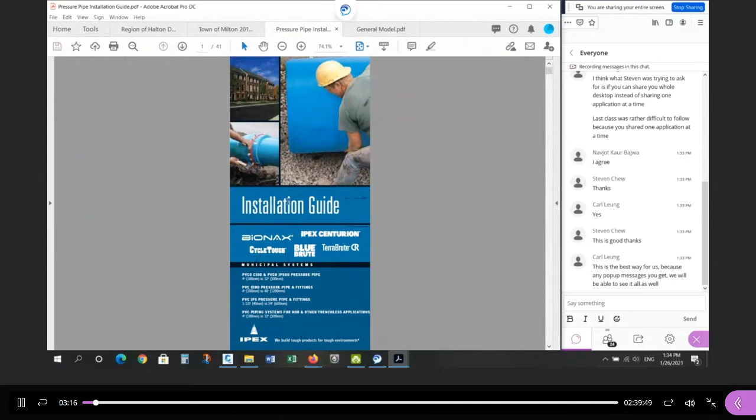So last day we were discussing the water main layout, and the water main layout is based on this document here, provided through the installation guide. So some of the features related to the water main are here. There's two techniques we discussed. We can do a joint deflection technique to mimic a radius, so kink the pipe at every joint connection. That's one way of approximating a curve. Or you can bend the actual pipe. So there's bending the barrel and there's deflecting the joint.

One of these is not allowed. Did anybody look it up in the standards? Which of these two techniques is not allowed? Are you allowed to bend the barrel or are you allowed to deflect at the joint? Bending is not allowed. And which document did you get that from, Carl? Where did you figure that out? Halton standards. Okay, very good.

So if you look at the Halton standards, you have to look at both standards. There's the town of Milton, which generally concerns itself with the roads, the storm sewer and the storm management. Sorry, I'm just going to the beginning of the document. So the town of Milton engineering standards really concerns itself with the roads. You can see here the roads, lot grading, traffic control, parks, and then drawing submission, engineering, and so on. These are the different categories that it's concerned with.

You won't see anything here related directly or in detail for sanitary or water main. Sanitary and water main usually falls under the jurisdiction of the regional government. So the storm drainage is here with the grading. So you have to go to the Halton standard. Now, when you look at this at a glance, you can actually see where the 3-hole punches are. So this is just a scanned document of the hard copy.

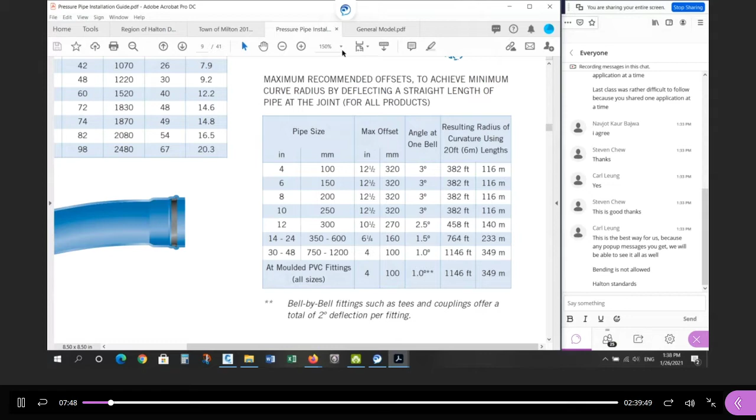So if there's a radius that's bigger than 116, then you can joint deflect to approximate the radius, okay? With this 3 degrees, and we're not going to use 3, we're only going to use 2, as it states in the standard, right? Use 70%, so 70% of 3 is roughly 2, it's 2.1, so we'll use 2. We're going to use this deflection to then navigate tighter curves without bending the barrel, but we will allow the joint deflection.

What I'm interested in doing is using these fixtures. You remember 90 degree elbow, right? 90 degree, 45 degree, 22 and a half, and 11 and a quarter. Okay, so these are the joint deflections. What am I talking about? Remember in the corners, let's go back to the drawing. Remember in the corners here, I want to go from this direction to this direction. This radius is too small.

If you list it as a standard offset of the center line or the edge of the road, it's going to be too small, 15, nowhere near 116. So you can't curve the pipe like that. So now I need to change direction from here to here. You may want to keep the curve just as an idea of where you want to put the pipe, but it can't be curved. So you might want to split the difference. I'm just going to connect this point to this point and move this line approximately here, so not right to the edge of the circle, not at the beginning, but somewhere in between, okay?

And you won't know where to put this until you finalize the location of the sanitary and the storm sewer. How do you finalize the sanitary and storm sewer? You have to put in the service connections for these 2 lots, and then you can finalize the position of the water main, okay? We'll talk more about that when we do service connections in a little bit.

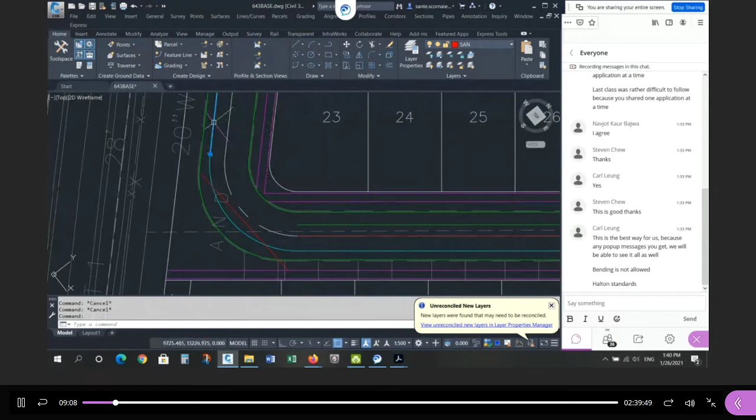So if we look at the deflection angle, you can see even by eye it's not 90 degrees. So if I extend, say, to the street line this pipe, and I extend that pipe, this angle in here is the deflection angle. So if I type in DIM and then ANG for angle, dimension the angle, if I click here and here, it tells me what the angle is. This is 96 degrees. Almost 90, but not quite.

Here's what we're going to do. We're going to take advantage of, okay, and this is a little bit of knowledge regarding the joint deflection. Let's go back to the joint deflection, right? We can kink the pipe a little bit. And we can kink it, the manufacturer says 3 degrees, right? It says 3 degrees right here, but I'm going to use 2 degrees. So at each joint, I can wiggle the pipe by about 2 degrees.

Okay, so what does that look like? Let me draw something. It might make more sense. Okay, everybody see my hand? Can you see me there? Just give me a quick yes, somebody.

Okay, so here are those fixtures. Suppose we had a water main coming down here and then turning here at exactly, this is the deflection angle. Let's say the turn was exactly 90 degrees, right? Well, then I could use a 90-degree elbow and I'm done. Okay, that's one way. I could split the difference. I can do this and have a 45-degree bend here and a 45-degree bend here. Okay, and then I can get rid of this. So here's another way.

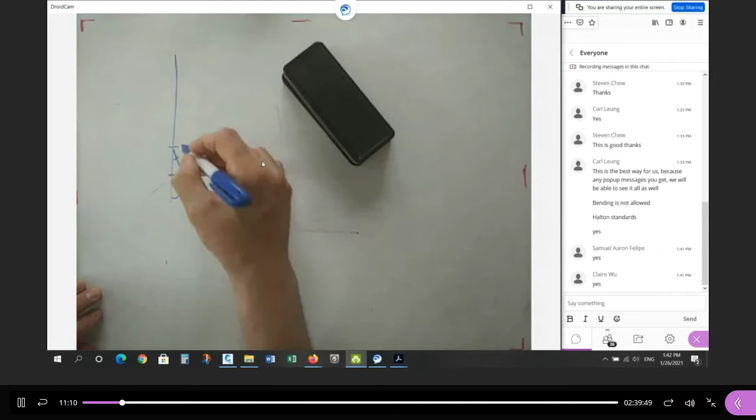45 divided by 2 is 22.5 degrees. 22.5 degrees, 22.5 degrees, 22.5 degrees. So I can get rid of the 2 45s and put in 4 22.5s and so on. Okay. If you do that, you can start to see the pipe kind of starts to look like a curve. So you can use the defined elbows to navigate these changes in direction. Again, the original two lines are exactly at 90 degrees to each other, right? The deflection angle is exactly 90 degrees.

In our drawing, let me go back to the drawing because I dimensioned it. In our drawing, we don't have 90 degrees, we have 96 degrees. Okay, 96 degrees. Back to my sketch. We have 96 degrees. So the deflection angle is 96 degrees. Here's how I'm going to use the manufacturer's installation guide to my advantage. So let me see if I can draw this. So I'm going to go here, and then I'm going to do this. Right? So here is the 96 degrees.

Okay. Now, if you look at each fixture, whoops, there's a delay there. If you look at each fixture, you'll see 90 degrees exactly. You'll see 45 degrees, right? So 90, 45, 22 and a half, and then finally 11 and a quarter, right? 22.5 and 11.25 degrees. These are the different things you can buy. Remember, this is 45, this is the 90 here, this is the 22, this is the 11, okay? Those are the changes in direction.

If we think about that joint deflection, remember the plus or minus 2 degrees. It means when you install one pipe, and typically the pipe lengths are about 6 meters, when you put the next pipe in, the next 6 meters and the next 6 meters, right? At the joint where the pipe is connected to the next segment, you can wiggle. You can take this and then offline you can go this way or this way 2 degrees. 2 degrees here or 2 degrees here, right? So you can wiggle the pipe.

Give me 2 seconds. I'm just going to grab a prop. It'll make more sense. Just hang on. Don't leave. Sorry, I couldn't find what I was looking for. Sorry, I didn't have it ready.

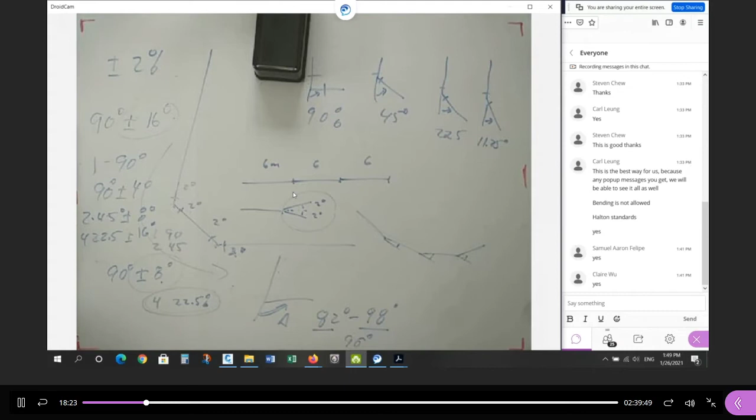And this is how the installation guide, together with the deflection angle, gives you a way of navigating not exactly 90, not exactly 45, not exactly 22.5, and so on. Okay, so this is the little trick that's played during construction because you understand the manufacturer's installation. Okay, any questions about that?

So would it be safe to assume that the more joints you have, the higher the chance of having issues within the pipe? No, at the joints you're allowed to wiggle 3 degrees, and I'm only going to assume it can go 2 degrees, so it's safer. And there's not a problem with that.

Now, there are other construction techniques. When you round a bend, sometimes they want you to backfill the trench with concrete around all these fixtures so that they're solid. They don't move. They're called thrust blocks. But that's a little bit beyond what I'm trying to show you. I'm talking about the installation guide being used as a design guide. I'm not going to give you all the details of construction; that's not really the focus of this course. But generally speaking, when there's a change in direction, they want you to fill the outside of the turn with a block of concrete. But again, that's more of a construction consideration, not a design issue.

All right? So let's go back to this document here. When you look at this entire subdivision, at these corners, you can tell by eye that this water main here versus this water main pipe here, they're not at exactly 90 degrees, but they're using two 45-degree bends, which sum to 90.

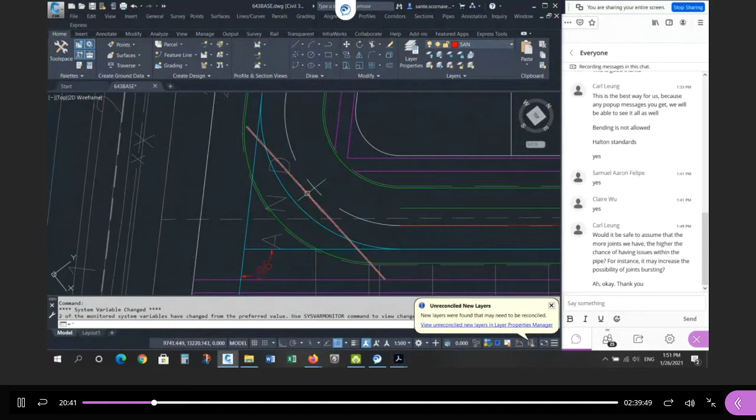So if I had to do this, and again, I wouldn't finalize this just yet, but I would put this pipe, right? Remember how I drew this pipe, right? I joined the ends of this curve, right? This point over to this point. That's how I got the two equal angles, right? So from here to here, or from here to here, this is how I drew the angle. And now I'm going to move it.

That's too far into the road, and I can move it over to here. That's too far the other way. It's going to be somewhere in between, so that the straight line kind of straddles the curve, right? Part of the curve is on one side, part of the curve at either end is on the other side of this alignment. You won't know where to put this until you finalize the position of these two, the end of this pipe. Okay, and we'll talk about service connections next. Any questions about the water main layout?

So in all the corners, here and here and here, you can propose two 45-degree bends to navigate what looks like about a 90-degree change in direction. Okay, so again, use this as a guide, right? See how they did it in this other subdivision, and you can do something similar. They've actually done it here. Any of the corners, it's almost always two 45s. And remember, a 1/8 bend is a 45-degree bend.

What are the text standards for the assignment? The radius annotations in the existing drawings are smaller than those for the pipes and water main. I'm not sure what you mean. Can you give me an example? The height of text. Yeah, so the final drawings that you need to produce at the end of the course are going to be a 1 to 500 scale. So your standard text height is going to be 2 millimeters on paper. So to achieve that, you need a text height of 1 meter, right?

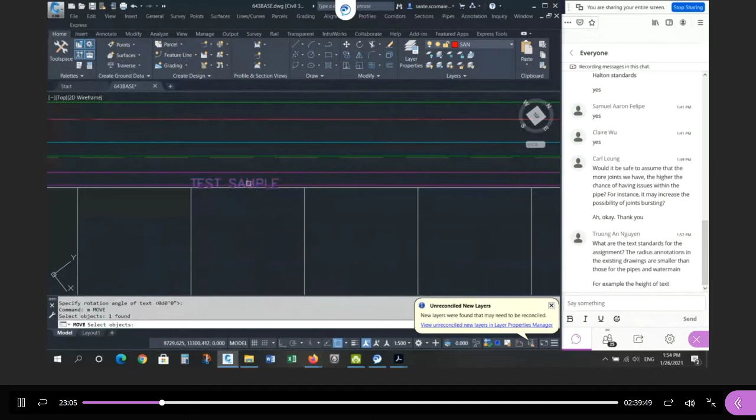So when you're in AutoCAD, the standard text height, dtext or mtext, whatever you use, once you put this in, test sample. So if you look at this, the height of the text needs to be 1 meter high. So if you use the style L80, it'll give you a 1 meter high text. Now, if you want to go a little smaller... But the text height for radius is smaller in the sample drawing. Let me see an example of that.

You're talking about here. This text height is equal to this text height. This is a little bit bigger. Don't worry about this. The label for the pipes will take care of itself when we have the style for the sanitary and storm pipe networks. Okay, we'll get into that. But these typically are 2 millimeters high, or sometimes 3/4 of that, which would be 1.5 on paper. So you need 0.75. So these are the standard heights.

So you can use a standard height of 1 meter, you'll get a 2 millimeter high text on paper. If it's cluttered and you need to make the text a little smaller, then I believe there's an L60. Instead of L80, you can go to L60. I don't know if we have it, maybe not. Okay, so then just change the text height. So instead of a height of 1, use 3/4, 0.75. So this is standard text height. This is a little bit smaller, right?

And you might want to use this height for your dimension height. Okay, but this is the typical text height. If it's a 1 to 500 scale, which it will be, you want a text height of 1. And if it gets crowded, you can reduce it by about 3/4. You can use a 0.75 high text. Yeah, it's good to anticipate that. Otherwise, you do a lot of drafting, and then the text has to be changed, and then you've got to move stuff around later. Yeah, that's a good question.

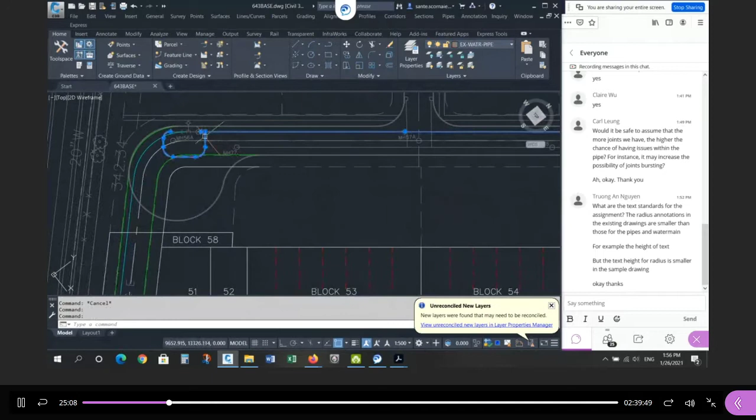Okay, any other questions about the water main layout? Okay, so you need to navigate this corner, and this corner here with 45-degree bends in all three places. Okay. Now again, a word of warning: everything you see, all this existing stuff, everything in gray, all the existing layers, do not erase, trim, delete, leave everything. Everything you see as existing has to remain on the drawing as existing.

Okay. Whatever you add, just put it on, and if it looks like there's something there and there's something new on top of it, leave it. You want to show the new, the proposed stuff. You want to show the old in case there's a removal to consider. Okay, so never draw it as if the construction's done. Don't remove something digitally because it has to be removed in fact, in reality. So leave it in the drawing so it gets identified in the estimate.

How do we name the cross and T? I would use, in the drawing here, they're using the fractions. I would use 90 degrees, 45 degrees, 22.5 degrees, 11.25 degrees. So don't use this notation. Okay, use the notation that I have. Okay. Truong, does that answer your question? I mean in the intersection. How do we name the cross and T? Talking about the water main, this stuff here.

Okay, so now you have to decide based on the pipe size. Okay, that's a good question. So there is a valve chamber detail. If you go to the Halton standards, every time the pipe crosses, there's a T or a cross, you need to have a valve chamber. So if you go to the end of this document, you'll find the valve chamber details. So there are two valve chambers, 400s. Where is it here? 400, this one. So this is standard 400.01.

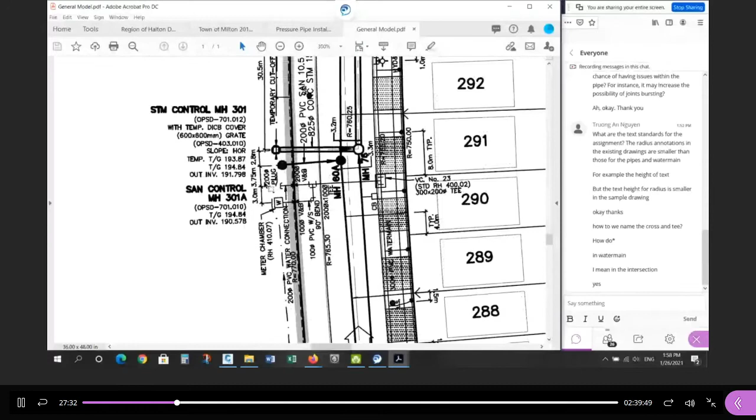So in this location and in this location, the two inside intersections, this intersection and this intersection, you're going to have a T, a water main connected to another one, the T location, and a water main, if you trim it here, another T intersection. Okay, notice this is not 90 degrees. Okay, so you need to put a chamber here and a chamber here, a valve chamber. If all the pipe sizes are 200, now you need to decide.

Okay, this structure is for any valve between 150 and 250. So you could use this, right? If this is a 200 and this is also a 200, you can use this round chamber, standard 400.01. So this one will work if you choose to use it. This one is for anything between 150 and 300. So again, we've got a 200. This shows a cross, but if you just had a T with the 200, you could use this chamber as well. So you have a choice of the 400.02 or the 400.01.

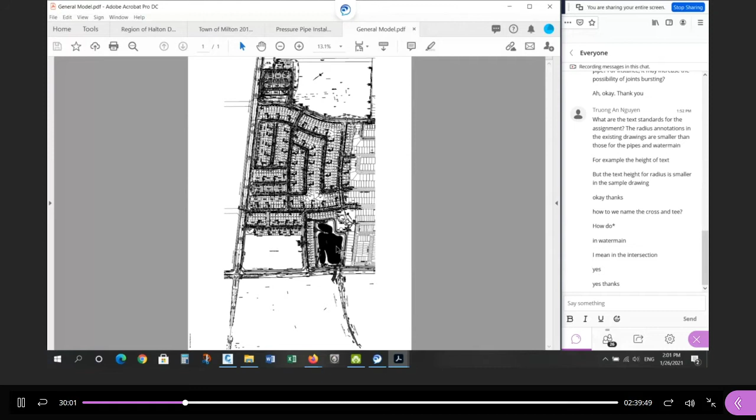So you could use either one, but one of them is preferred based on what happened before. So do some research, scan around and see what was done before. There is an example of a 200 by 200 T in this site. That's the big fat hint. Okay, so you got to figure it out. You really need to study this drawing to get a good idea.

Yeah, you want to label the water main, right? So again, if you're going to put in two bends, see these little tick lines, these two short lines? That represents there's a bend there, right? And then there's another one here, a bend here. So those little short ticks. And if you look at the drawing, you can borrow some of the line work, right? That's a T, right? This is a 90-degree bend.

So this is the size of the tick, and the distance from here to this intersection is roughly where you want to put the two ticks, right? They're just drawn manually. So that's what a T looks like. You can draw it. That's what a 90-degree bend looks like. You can draw it. If you rotate this from here this way, negative 45, there's a 45 degree and so on, right? So you can draw these for yourself.

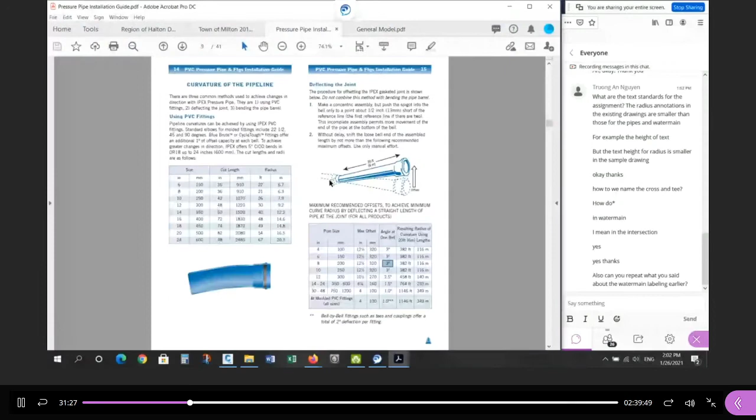You want to label those with the different fitting names. So this would be a 90 degree. Don't use a quarter, it's a 90 degree. So remember, they're labeled according to the manufacturer's guide. So if you look at the fittings, 90 degree, and we don't use the word elbow, we use the word bend. So 90 degree bend, 45 degree bend, and then the next page, 22 and a half and 11 and a quarter.

They call them elbows, but we label them on the drawing as a bend, and you can see that here, right? Two 45 degree bends is what's shown, one here and another one here. Does that help, Truong? Answer your question? As a drafting guide, look at what was done in the other subdivision and create information that's very similar.

All right. So that's the water main. That's just the water main. There are two T's, so you need to propose two valve chambers. The other thing you need to propose is two more pieces of hardware related to the water main. You need to lay out the fire hydrants, and you need to lay out the line valves. Let's talk about the line valves first, and I'll show you a mistake I found on this design.

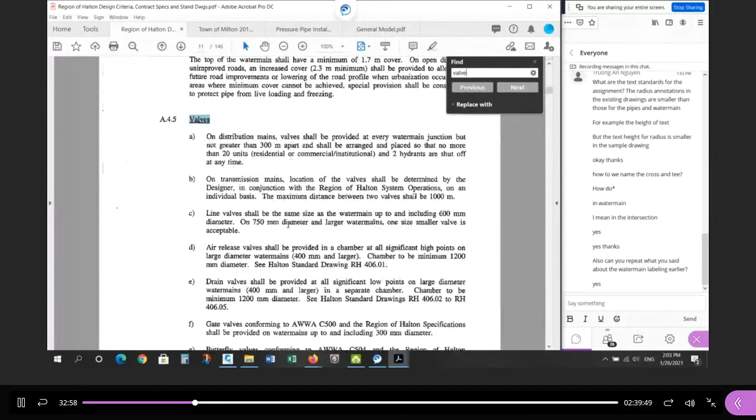If you go to the Region of Halton, and you talk about valves, I'm going to do Control F, valves. The valves here for the water main. Water valve chamber, pressure valve, valves. So here's the line valve stuff. Transmission lines, where is it? The first note. This is the note you want to look at.

On distribution mains, which is what we're laying out, valves shall be provided at every water main junction. So there are valves inside the valve chamber. Don't worry about those valves. Once you put a valve chamber there, it's understood there's valves inside. The other thing you want are line valves. I think they're on the next page. Oh, here, it's the same note.

So, at every junction, but not greater than 300 meters apart, place a line valve so that there's no more than 20 units in a residential or commercial institution and 2 hydrants shut off at any one time. What does that mean? Let's look at this drawing and try and explain that. I'm going to look at this stretch of road right here. So at every junction we have a valve chamber.

Okay, so there's no water main here, that's fine, but there is a valve chamber here. So here's the valve chamber right here. Okay, so there's the existing water main on the main road, and now it's coming into the subdivision. So from there, it comes in, there's no water main on this road, and then to this intersection, here's the next valve chamber. Okay, so there's a valve chamber here, and there's a valve chamber at the existing intersection here.

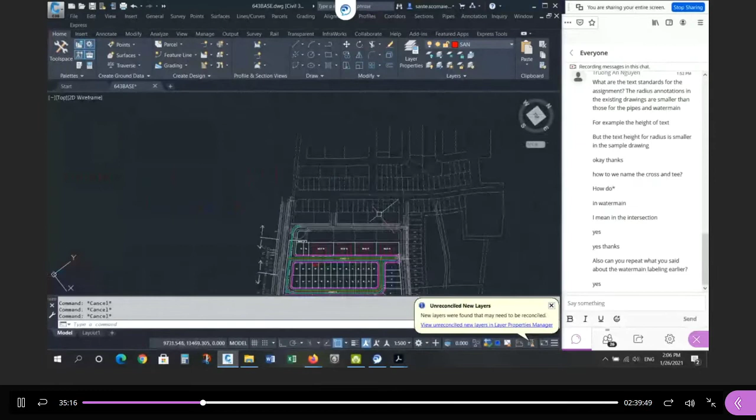Right, so I'm going from a distance from here approximately to this intersection. It's less than 300 meters. Okay, so you don't need anything in between. If you do get further than 300 meters, then you need to put in another valve. Okay, now the valve you put in is meant to do 2 things. If I put in another valve here, you want to be able to isolate.

Like if the pipe breaks, you want to make sure you can shut off the water main so that you don't have water disruption to more than 20 units. Okay, so between here and here, do we have more than 20 units? Well, let's take a look at the drawing. Right, I'm going to look at this. So between this point here and this point here, how many houses do we have?

Well, we have 1, 2, 3, 4, 5, 6, 7, 8, 9, 10, 11, 12, 13, 14, 15, 16, 17, 18, 19, 20, 21, 22, 23, 24, 25, 26, 27. So if I shut off the water main between this point and this point, I'll disturb flow to 27 houses. Okay, and that's not allowed technically according to the rules.

All right, so what you want to do is put in a line valve, right? A line valve somewhere between here and here so that you can shut off the valves in one of the chambers and then somewhere along the road, and now you can isolate less than 20 units here by shutting this part of the water main off, or less than 20 units here and shutting off that part of the water main valve. You'll notice on this drawing there's no valve chamber.

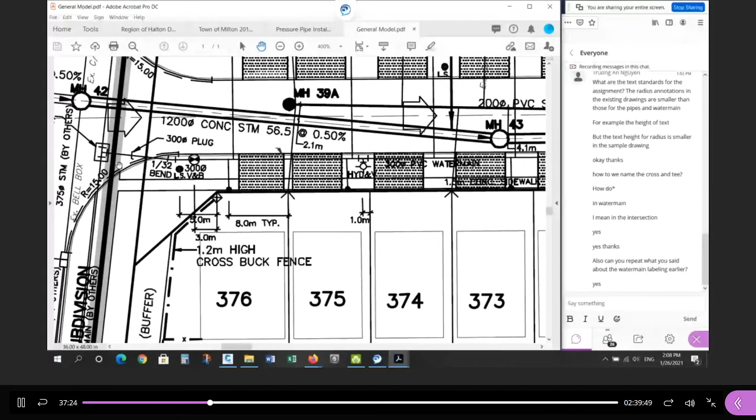This is not a maintenance hole. It's just a little cap on the ground that you put a key in and turn the valve on and off, right? So you can't crawl into this space. You can only crawl into these chambers. These are like the maintenance holes. This is not. It's just a little key access. So between here, if you look along the water main, up to here, there's no other valve.

So here, technically, between this point and this point, there should be a valve to isolate a piece of the pipe, right? Again, I'll draw it. If there was a valve here, we could shut this off, and isolate water just to these units. Or shut this off, and isolate the water just to these units.

So in my opinion, this design is lacking a valve box between here and here. Because if you shut this off and you shut this off, you're going to disturb more than 20 units. And according to that rule, no more than 20 units disturbed. Okay, now they made an attempt and they still screwed it up on Chuchmach. So I'll show you that one as well.

Here's an example. I'm just analyzing what you're supposed to do and what was actually done. Let's look at this drawing here. This is Chuchmach, just to the north of us, right? Our site's down here. So there's a valve chamber here. So if you shut the valve off in this chamber, if you move along the water main here, you'll see another valve and box here. Okay, again, this is like a maintenance hole. You can crawl inside. This one here you can't. It's just a little cap on the ground.

You open up the cap and you put a key, like a long rod, and you turn it. Okay. So if I were to shut this off and shut this off, how many houses would be without water? So let's do the math. And look at the service connections. This is the water pipe that brings water to this unit here, number 5. And notice it's just to the right of the valve chamber.

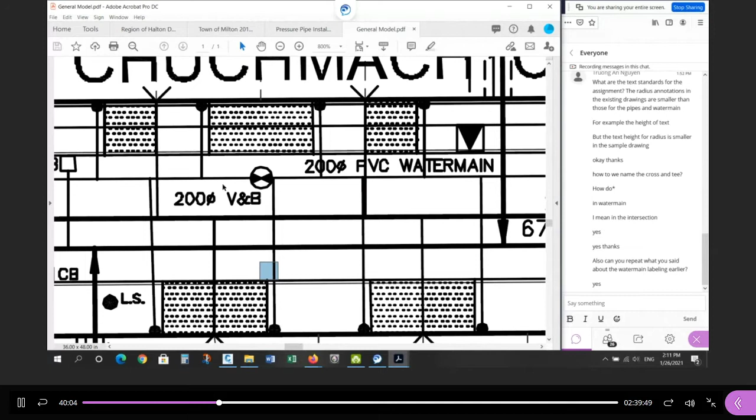If you put it here, then there'd only be 20 units on this side. Okay, so to correct the problem, you can move this over to here and have this connection on this side of the valve instead of this side. Okay, so you need to worry about this too. When you lay out your valve chambers in the site, let's go back to the subdivision.

How many units do we have on street A? Right? Well, we have 1, 2, 3, 4, 5, 6, 7, 8, 9, 10, 11, 12, 13, 14, 15, 16, 17, 18, 19, 20, 21, more than 20 between this point and this point. Right? So between here and here, there's more than 20 units if you shut off the valves at the 2 intersections. So between this point here and this point here, you need 1 valve box.

There's less than 40 units here. So put the valve box somewhere between the 2 intersections, so that if you shut off that valve and either of the 2 intersections, there's only 20 units between the 2 shut-off valves. Okay, so you need at least 1 here, and you'll find between this point all the way around to this point, you've got just less than 40 units again. Double check, you have to count them.

If there's more than 20 units, you need 1 valve chamber. If there's more than 40, you need 2 valve chambers. If there's more than 60, you need 3 valve chambers, and so on. Where do you put them? Wherever you like, as long as the shut-off main doesn't disturb more than 20 units. Okay, so that's how you lay out your valve boxes.

So the chambers go at the intersection. The valve boxes go on the line of the pipe between the intersections. So you've got a situation between these 2 intersections and a situation between these 2 intersections. Okay? Any questions about that? I wouldn't worry about the line valves until you service each of the units.

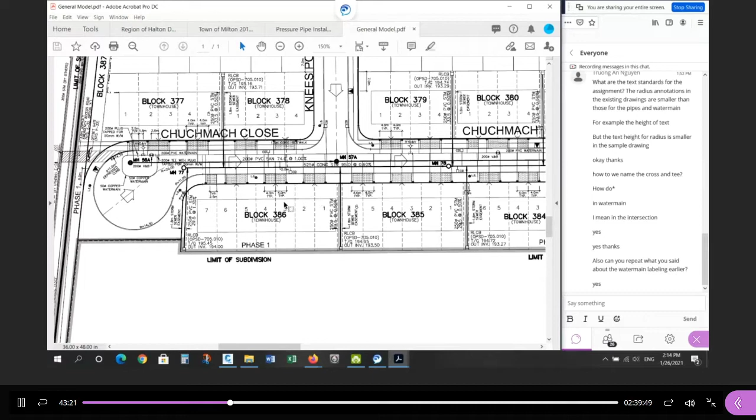Right? If you look on the road, on the water main side, you see that hydrants, right? HYD and valve, so that's the label. There's actually a valve here that we don't draw. It's understood that there's a valve to shut water off from the main to the actual device.

If you look at the Region of Halton standards, there's actually a drawing for it. It's at the end of the document. You'll see the hydrant. Sorry to do that very quickly. So the hydrant and valve looks like this. Now, this is basically what the hydrant and valve looks like. This is on a rural road. There is an urban version of it. I don't know why they don't show it. Oh, here it is. So this is maybe the urban.

So you've got the water main, right? The main line of the pipe, and then it branches off to the hydrant. But between the main and the hydrant, there's a valve. But in the plan view, we don't draw the valve. We just label it hydrant and valve. It's understood there's a valve between the main and the actual hydrant.

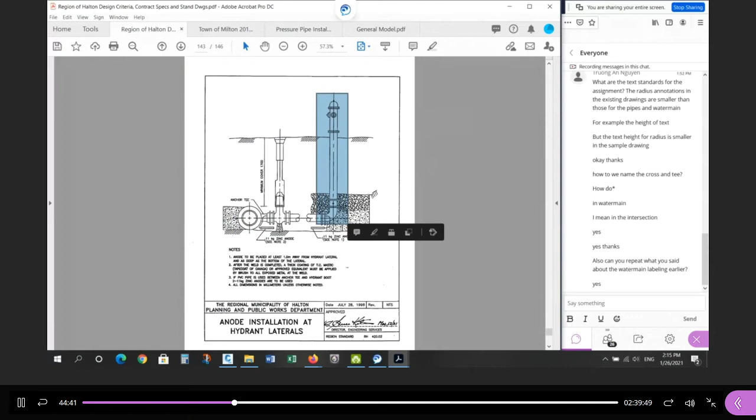So if we go back to the drawing, if we zoom in on one of the hydrants, right, here's the hydrant, right? On this pipe, there's actually a valve. There's a valve here, but we don't draw it, so that you can shut water off from the main to the actual hydrant device. Okay, but we don't draw it, we just label it hydrant, HYD and V. And that's what the drawing looks like, right? HYD and V. So we don't draw it, we just label it.

Where do you put the hydrants? The hydrants now are based on a maximum distance. So if we go back to the standards here, hydrant layout, I'm going to just search the document. So hydrant, dead end, maximum allowable, where is it? Maximum distance for the hydrant is, here we go. So here's the table. If you look at table A47, it tells you in a residential neighborhood, which is what we have, maximum spacing 150 meters. So from one hydrant to the next hydrant, 150 meter maximum distance. Okay? Now, that's the standard.

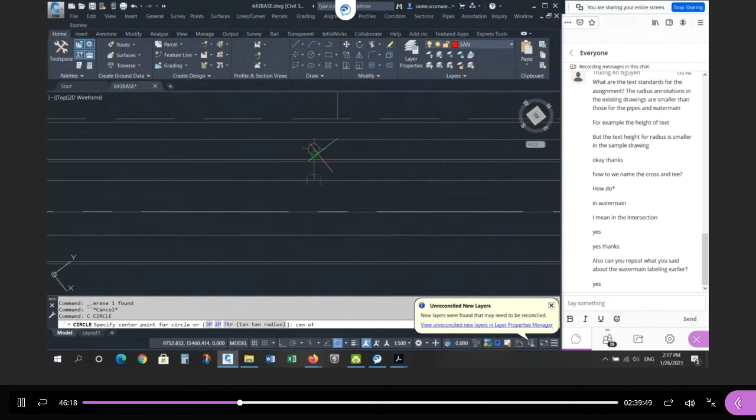The way we put that into practice is a little bit different. What we're going to look at is this. Go back to the drawing. If I know that this hydrant is here, I'm going to draw a circle with a radius at the center of the actual hydrant, a circle with a radius of 75 meters. So there's 75 meters from here to here. Now I'm going to find the other hydrant. Here's another hydrant. I'm going to draw a circle from the center, also 75 meters. If these two circles touch, I know the distance between the two hydrants is 150 meters, 75 plus 75. Two of the radii equals 150 meters.

So here we go. You'll see this versus this. See how they're not touching? It looks like there's a hydrant missing between here and here. Now, you might not have everything you need on the CAD file. Let's go look at the actual PDF. I think there's another hydrant here somewhere that might have got missed on the CAD file. So on Chuchmach, this is the first hydrant where I drew the circle. This is the last hydrant where I drew the last circle. And somewhere between, yeah, see, there is a hydrant right here between unit 2 and 3 on the north side. So if I drew that circle, then the three would overlap. So this hydrant is actually missing on the CAD file that I gave you.

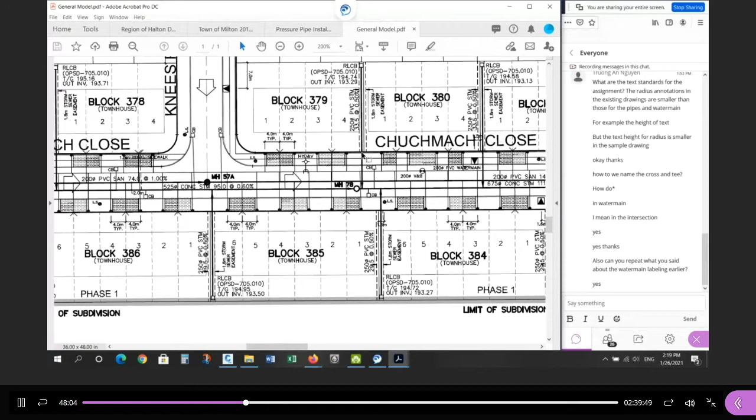If that were there along the line of unit 2 and 3, let me see if I can draw that. See that the unit lines are missing. I can't even draw it. Let me see if there's a dimension. Not really. So it's unit 2 and 3. I'm going to assume the unit width here is the same on both sides of the road, the same as what we're doing on our site. So I'm going to go from this block line 1, 2, 3 units over, starting on the edge. I want this distance. I'm going to go to my CAD file, start here, and make a copy. Let me see if it works. A copy of this stuff from here over to here, and I'm going to ignore the last few.

Okay, but from here I'm going to go 1, 2, 3 units. Let me see what that is. From here I'm going to go 1, 2, 3 units. 1, 2. So there should be a hydrant right here. So I'm going to make a copy of this hydrant. Should be approximately. This is what's missing. Now you don't have to do this. I just want to show you for an example, right?

So where does the hydrant go? I'm going to offset from the center of here, perpendicular to center. So that's the offset to the center of the hydrant. I'm going to make a copy of that from the center, intersection of this offset line and this unit line. That's where the hydrant should go. Okay, so there should have been a hydrant there, and it's not showing for some reason.

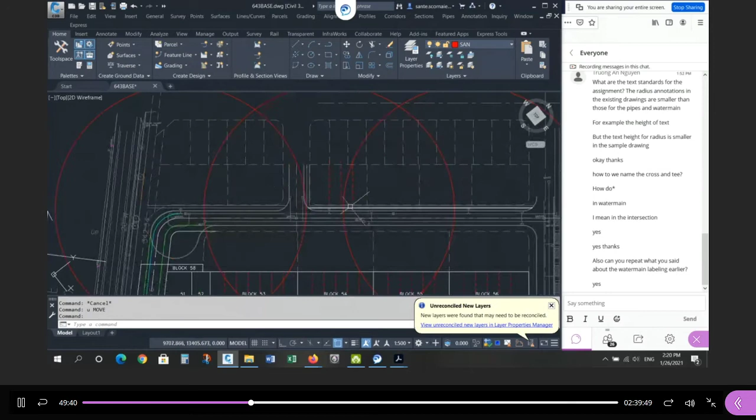Okay, if I draw a circle here, 75 meters, you can see this circle intersects this circle. If I take one of these circles and I move it over, if they were just touching, I'd have 75 meters from here to here and 75 meters from here to the center. But you can see they're clearly overlapping. So when you're overlapping your circles, you know that the centers of the two circles are less than 150 meters apart. Okay, so that's how we kind of lay out the hydrants using these circles.

Now we don't just look at the distance along the center line of the road, we actually look at the lot coverage. Okay, this is kind of weird. So you don't have that hydrant there. Don't worry about it. We're not checking what's happening outside the site. We want to make sure that we get our site. So I want to know where this one is, and I want to know where this one is. What's happening in between here is not that important to what we're going to do.

But let's draw some more circles here. I'm going to draw a circle from the center of this hydrant, 75 meters. I'm going to go to the next hydrant. Next hydrant is here. I'm going to draw a circle, center, 75 meters. Notice these two overlap, which means the distance between the center of this circle and the center of this circle is less than 150 meters. Everybody see that?

And if I keep going, I believe there's another hydrant north of here. So from here, if I go north, I think there's one at the intersection. Again, it's not a complete document. So I found this hydrant, and I think there's one at or near the intersection here. The water main jogs across the street, and there should be a hydrant nearby, I hope. Hydrant here, and then there's a hydrant here. Those two are pretty surely less than 150 meters apart, and so on.

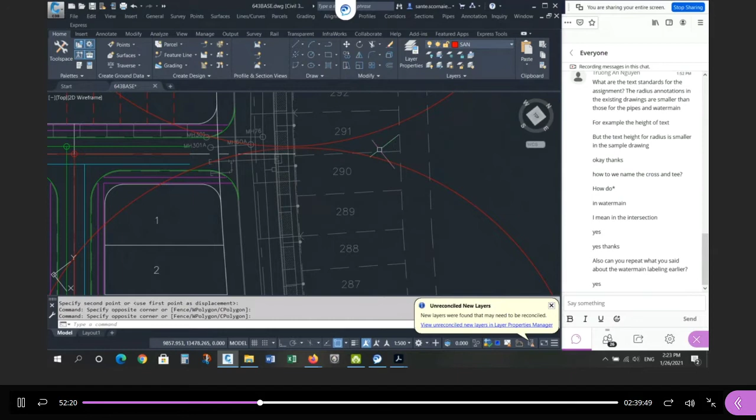So then you would have to move that hydrant over so that everything is inside the overlap of all the circles. If there's any gaps like this, they're going to make a comment. Yes, they're less than 150 meters apart along the road, but there's a part of the backyard that's missing. So you want all these circles to overlap a little bit, and you want to make sure that the backyard area is inside one or the other or both circles. Right here, this little piece is missing, so that's no good.

So what am I talking about? We need to place hydrants inside the site. Where do you place the hydrant? How do you know where to put the hydrant? What's the distance from the center of the hydrant to the right of way? That's on the standard. So we can look at E2 again. So if we go back to E2, this one here.

So if we look at E2, how do we draw the hydrant? Well, we know the hydrant is 2.6 meters away from the street line. And the hydrant is on the same side of the road as the water main. We wouldn't put the hydrant on this side. We don't want this part of the pipe to cross the sewers.

So wherever the water main is, that's the side of center that the hydrant is also on. And you'll see that in the drawing already, right? Here's the center line. The water main's on this side, so the hydrant's on that side. We never cross the sanitary and storm sewers. We keep the hydrant and the water main all on one side so that we don't have any crossing issues.

So the offset is 2.6. So to draw that in our subdivision, if I wanted to put a hydrant, say over here somewhere, I would offset 2.6 from the street line. So anywhere on this line is where I can put my hydrant. Same thing here, offset 2.6. Anywhere here I can put my hydrant. Okay. Where do you put it?

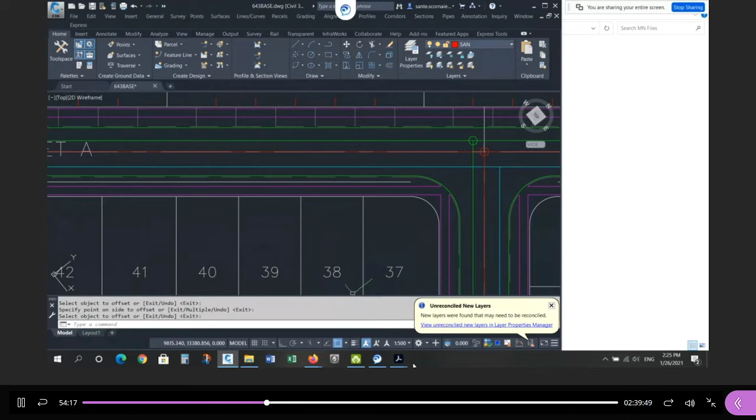Well, you need to know where all your driveways are. You can't put a hydrant in the middle of a driveway. So this is something you do after your driveways. You don't put a hydrant in on top of one of your water or sanitary sewer connections. So you have to service each unit. What do I mean? Before you lay out your hydrants, you want to know for each lot where is the sanitary connection and where is the water main connection.

So you want to lay out your services first. You want to lay out all your driveways first, so that then the hydrant is not in a driveway, is not on this pipe, is not on your sanitary pipe, right? Because you can't have the hydrant on top of anything else. So the hydrant is one of the last things you do. You have to lay out your driveways first. You have to lay out your water services first. You have to lay out your sanitary services first.

There are no storm services. Okay, they're using sump pumps. I'll show you that detail in a moment. You want each individual lot, driveway, sanitary, and water connection determined first. And then you worry about your water main hardware. Where do you put the hydrants? Where do you put the valves on the line? Okay, so it's one of the last things you do. So let me give you an example. Any questions about the hydrants and the water main?

I predict, I haven't done the exercise this year, you're going to need at least 4 hydrants. Okay, that's my guess. I haven't done the design myself, so we're kind of doing this together. I'll have to do it to mark it so that I know it's good. But if you look at our subdivision, I'm going to draw a circle, 75 meter radius, 75 meter radius, 75 meter radius, 75 meter radius. I predict you're going to need at least 4 hydrants, right?

Somewhere over here, right? And that's not close enough. You want them to overlap so that there's no backyards unaccounted for. So I'm just roughly figuring out. And then I want the center of these. That's roughly where the hydrants are going to be. And you can move them both together now, right?

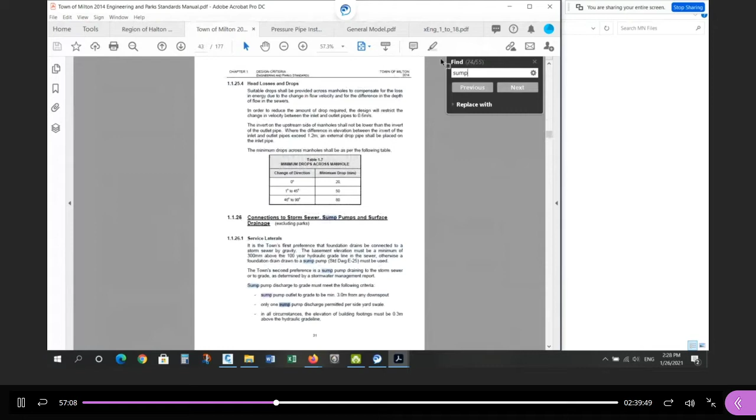Next set, sorry, 19 to 32. Sump pump looks like this. Whoops, like this. I believe they're doing this as opposed to this. There's 2 options. So basically the storm sewer is not as deep as your footing. So to collect the water around your footing, there's actually like a pit inside the house, and then they pump it up over the foundation wall.

They might pump it into a pipe that goes into the sewer, and I don't think they're doing that. Otherwise we would have to draw this pipe, or at least this piece of the pipe in the right of way. So they're not doing this, they're actually doing this. So again, they're pumping the water that accumulates around your footing into a pit in your basement, and then an electric pump will take that water up over the foundation wall onto the ground.

This will go along your front lawn, into the roadway, into the catch basin, into the street sewer. So this is what's happening. So there's no storm connections. And if you look at the drawing from the previous subdivision, you'll see that there are no storm connections, just sanitary. Right? This is the sanitary pipe. This is a pipe. It's a dual. It connects to both. Okay, so sanitary and water only.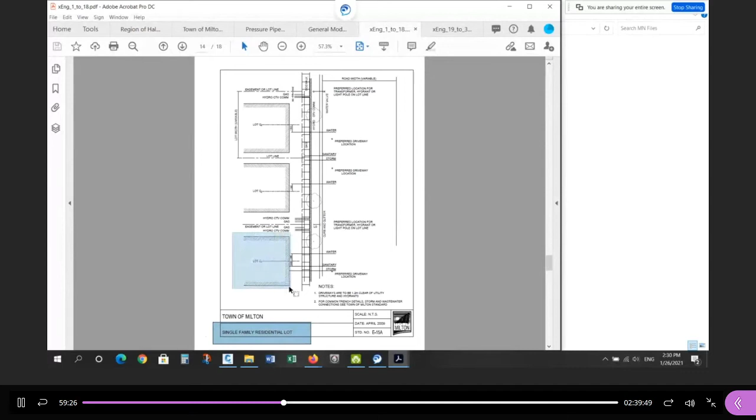You have examples of what those dimensions are. Now, there are standards which they didn't follow. So let's look at the standard, and then we'll look at the actual. Okay, so here is a single family residential lot. So 1 unit, 1 unit, 1 unit. This is how you service. Okay, so let's look at the middle one right here. If we have a property, how do we get water, sanitary, and storm to that property? Well, there's two ways of doing it.

You can do a dual connection. So there's one pipe, and then it splits off so that one part of the pipe connects to this house and one part of the pipe connects to this house. So this is called a dual connection, a shared service. Okay, that's one way of doing it. So every other lot line will have a double. Okay, and if you look at the design, you'll see that here.

Right, this one pipe services both of these lots. You can see the branch off here. Then you skip this corner and you go to the next one. This one pipe services these two lots, and so on. So these are called duals, dual connection. Okay. Now notice there's no storm sewer, so it's just a sanitary. So this is the standard, right? We only show the sanitary pipe, and it's right on the center.

Notice the split happens outside the right-of-way in the road, but on the drawing they show those inside. So the drafting is a little bit different, but that's fine. It's just a symbol, really. The other thing you'll notice is the water main. So if you take the center of the lot, 1.5 meters to one side, and if you stand on the road and face the house, is this the right or the left side? Is this offset right or left?

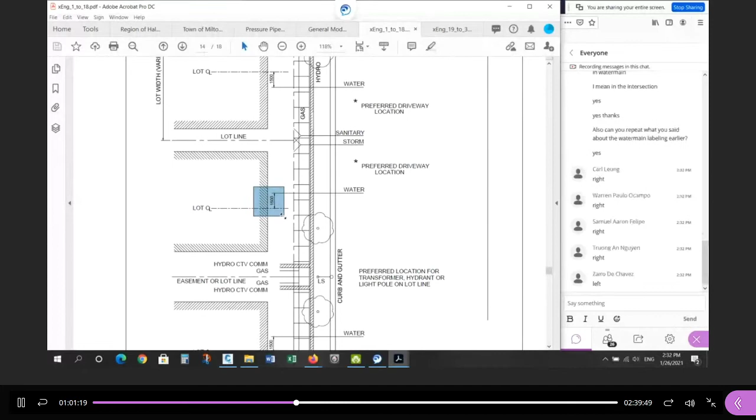Is this 1.5 meters right offset or left offset? If you're facing the house, are you putting the service to the right or to the left? The right. So when you face the lot, if you stand on the road and look at the house, this is on your right side.

Okay, so this is a dual shared connection, but we're only going to put in the sanitary, and it's right on the center. This is a single water main. There are no double water mains. Okay, they're always separate. Okay, so this is a shared connection. Now, if you have an odd number of houses, one of the houses needs a single connection. So you'll see that here, right here.

All right, so from the center line, you always put the water on the right side, 1.5 meters away from center. And the sanitary and storm, you put them on the left side, 1 meter away, and then a certain distance between the two pipes. Okay, and there's a drawing for how close those pipes should be together. We don't need to worry about it because we don't have a storm sewer.

Okay, so from the center of the unit, you go 1.5 meters to the right and 1 meter to the left for water and sanitary if it was a single connection, one pipe, one house. If you're going to share them, which is more cost effective, you put them between the units. But the water is always 1.5 meters to the right.

Okay. Here they're showing it 1.5 meters to the left. You see here, they're showing it 1.5 meters to the left. And why did they do that? Because it depends on where you put the driveway. Okay, so this is the standard. Let's look at what they actually did in practice. So if Professor Neruzzi asks you what's the standard, you can quote E15A.

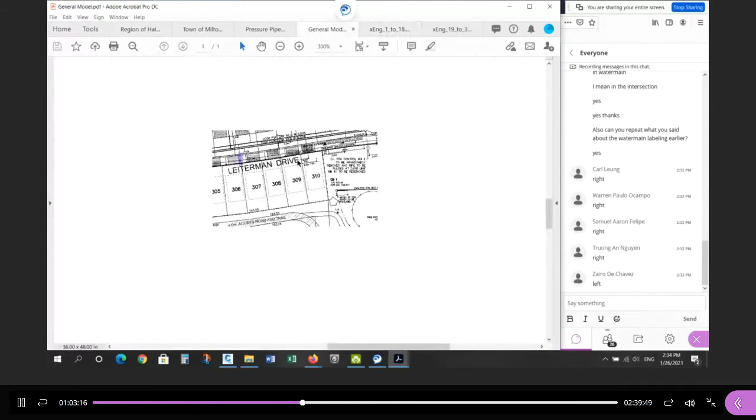However, the other engineer did something a little more practical. Okay, so let's look at how they laid out single lots for water and sanitary, and there's no storm. Okay, so let's look at the actual drawing. So this is the standard. This is not exactly what was done. If we look at the general model, and we can look at any single units, right, single individual homes, you'll see they paired them.

So the sanitary, two together. The sanitary, two together. So they paired them. If there's an odd number, then they went with a single. Where did they put the single? Where's an example of a single? Right here, this unit. See this single line? That's the sanitary connection. One pipe, one house. Whereas this is one pipe servicing two houses.

Okay? So this doesn't need a dimension. It's right on the corner of the property between the two units. This one here should be dimensioned. Where is this pipe? How do you know where to put it? So there must be a typical dimension somewhere. And I believe, if I can find it, right here, 6 meters. Oh, no, not 6 meters. Where is it? There's a typical dimension. I found it. I think it's on this street here. Here it is, 4 meters. So it's 4 meters from the corner closest to the driveway side.

And here's another, that's not typical. It doesn't say typical where the water service goes. They moved that from typical because of this valve chamber. So let's talk about this. I'm going to draw it. I think it's easier if I draw it. Okay, we're talking about single units. Let's go to my handwritten drawing. So let's suppose we have a bunch of houses. All right, so these are all single lots, not townhouses.

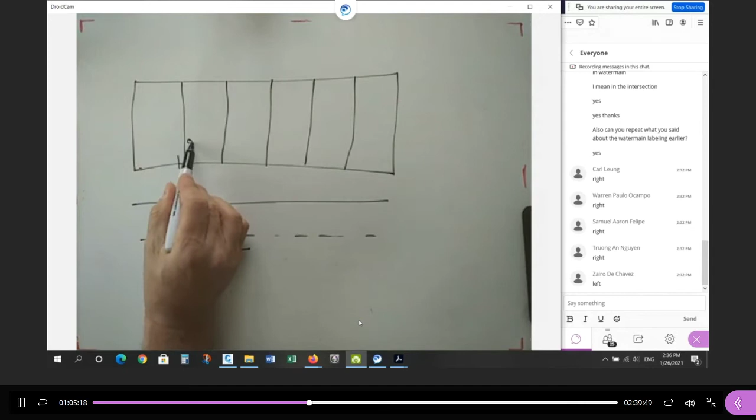Okay, if my back of curb is here, my center line of road is here. If the profile is falling this way, we want to lay out the drive first on the high side. So between these 2 points, this is the high side. So we go 0.6, remember this offset, 0.6 offset. And then we go 6 meters for the driveway, right? And where it's offset from the lot line, you want this and the driveway to be parallel.

So there's my driveway. Okay, and I can draw those all here. From the high side, 0.6, 6 meters away. From the high side, 0.6, 6 meters away, and so on. So these are my driveways. How do we do the sanitary connection? Well, 1, 2, 3, 4, 5, 6. There's 6 units here. Let me draw one more just so you can see the odd one. Suppose there were 7 altogether.

I would pair them. This is how I would do the sanitary. I would draw a pipe right from the corner to the sanitary sewer. Right? Let's assume the sanitary sewer is right in the middle, center line of the road. So I would draw one pipe and I would branch off into the 2 lots. Then I'd skip this because this is already serviced. So I'd draw one pipe, branch off into 2 lots. And here I would draw one pipe, branch off into 2 lots.

This one here, and let me draw the driveway, right? Remember it's falling this way, so this is the high side. So here's the driveway, right? 6 meters wide, 0.6 offset. Where would I put the service connection? From the high side, I'm going to measure 4 meters. So from here, I'm going to offset 4 meters, and I'm going to draw a pipe to the center line so that the distance from here to here is 4 meters typical. Oops, typical.

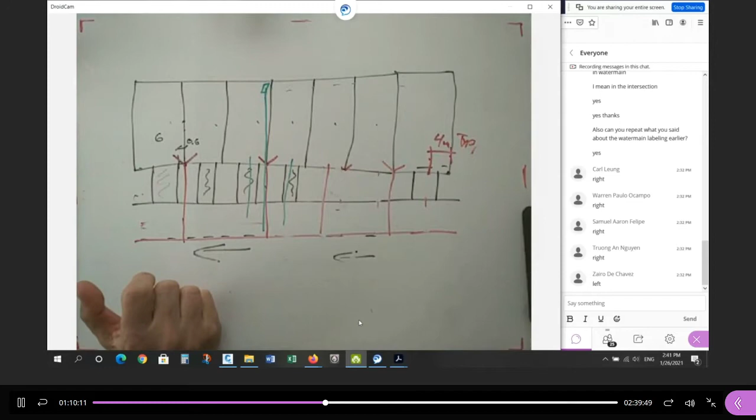I will mark what you've done at each submission as acceptable, as good, and then later, if an adjustment is required, I expect you to make those changes. But we won't know what they are until we advance the design all the way to the end. One full cycle. Okay, so this is just some advice on what the design process is and how it's going to work.

Okay, so that's the sanitary service connections. Just lay them out. You may have to change them later. That's just the nature of it. The water service, okay, that's sanitary. Sorry, then there's sanitary for townhouses. So let's look at that. Sanitary for townhouses look like this. So these are the single lots. They're going to be doubles, or they're going to be typically 4 meters on the high side under the driveway. That's how you do your service connections for sanitary on single residential lots.

If you've got townhouses, it's similar. Let's look at those here. You're going to pair them just like that, right? 2 together, 2 together. Never put a dual between blocks, right? Leave this spot between the 2 buildings free because you might have a rear lot catch basin back there. Okay, and we'll look at that later. So never put a double here. Always put in your doubles interior.

If it's an even number of units, it's easy, right? You pair these 2, you pair these 2, you pair these 2. No dimension required. Everything works out. Okay, so those are doubles. If you have an odd number, and there is one here, you pair as many as you can. So there's a pair, there's a pair, there's a pair. And then under the driveway, you put in a single connection. Instead of 4 meters, we use 2.5 meters.

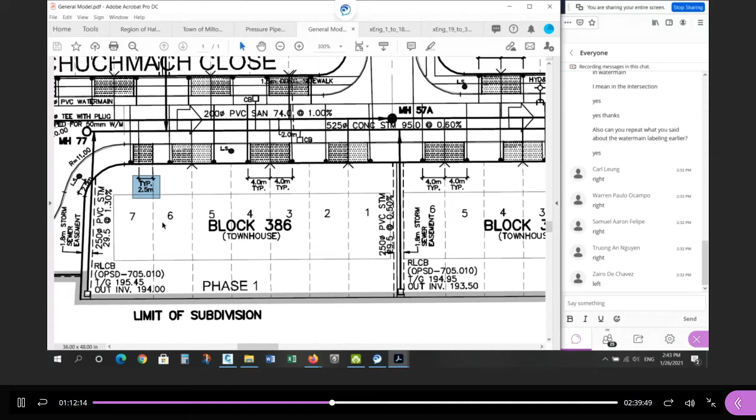So it's very similar to single homes, townhouses. If you have double connections, they're easy. You just put them between the units. If you have a single, it's under the driveway by 2.5 meters. If it's a residential single lot, it's 4 meters. So the dimension's different, but the technique is the same. Single units, typical 4 meters. Let's look here again. Single units, 4 meters for the sanitary connection. For a townhouse, single connection, same technique, different dimension, 2.5 meters.

If you have any of those, label at least one, typical, right? So then if I see another one, is there one here? See here, 1, 2, 3, 4, 5. One of these is odd. Okay, so they labeled it again here. See, 2.5 typical for this service connection, for the connection to the pipe. They could have left this dimension out because they labeled this one typical 2.5. So I know if there's no dimension here, it's 2.5. Okay, but you need at least one. So that's how you lay out your sanitary services.

Water services. I don't know if it's in the standards. You might have to look it up. They don't want the valve box, right? Right here, there's a valve. You can turn a key here to shut water off to the unit, right? The municipality can shut your water off if you don't pay your bill. These round circles here are the water boxes, or they're called the curb stops, okay?

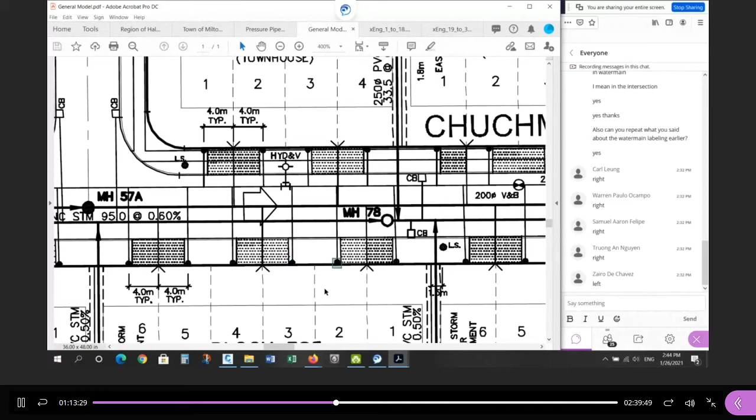Most municipalities, sometimes it's written into the standard, sometimes it's not. I can't remember in Milton what the standard is. But they don't want those in the driveway. They don't want the cars driving over these things because they get damaged over time. So they're always outside the driveway. So if you look at the single residential houses, there's always 2 categories. Where do the water services go? And there should be a typical dimension here somewhere.

Here it is. Okay. So if the distance from here to here is 0.6 to get the driveway, and the driveway itself is 6 meters, then the distance from the high side corner, edge of the driveway on this side, is going to be 6.6. From the same corner, we lay out the water service, and it's 8 meters away. So if this is 6.6, I know the distance here is 1.4. 8 minus 6.6, 1.4. So that guarantees that these services are always outside the driveway. So this is the typical dimension.

So every time you draw one of those, if you label one 8 meters, the next time you see one, you know that this is 8 meters away from this corner. And you know that this is 8 meters away from this corner, and so on, because there's one typical dimension. So once you have a typical, when you see something without a dimension, you know that the typical dimension applies.

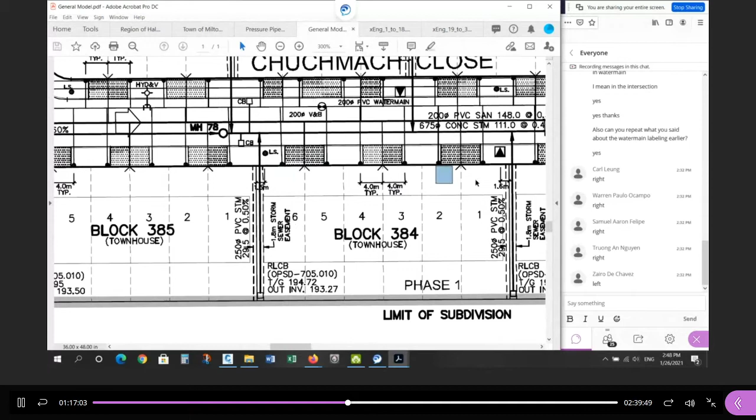So there's no label here. I know this is 4 meters, 4 meters, and 4 meters. I know this is 4 meters and 4 meters. Okay, if you have a single, for whatever reason, it has the same dimension. This, I know, is 4 meters away from this point here. This distance is 4 meters. Okay, so you need to label at least one. And that's how you lay out your water service connection for each unit.

Each unit has a service connection for water. They're individual. They don't double them. They don't share a common water service. They can share a common sanitary service, but not a water service. So again, look to this as a guide. How do you service the singles? How do you service the townhouses? Because we have a bit of both, right? Mostly singles, but on the north side of Street A, we have a bunch of townhouses.

Okay, so I'm gonna lay one out. So here's my driveway on the high side for this lot. Right, I could lay out my sanitary service here. So I'm going to draw a line. Here's one example. It doesn't have to be here. Perpendicular to the center line of the pipe. Okay, and then I'm going to draw a line here.

I'm going to make a copy of this. Bring it here. Rotate it 45 degrees. Put it here. Mirror that on the center line of the pipe. And then I'm going to offset it. I'm going to use about 1 meter. Again, it's schematic, about 1 meter into the lot for the length of this. So there's your sanitary service connection.

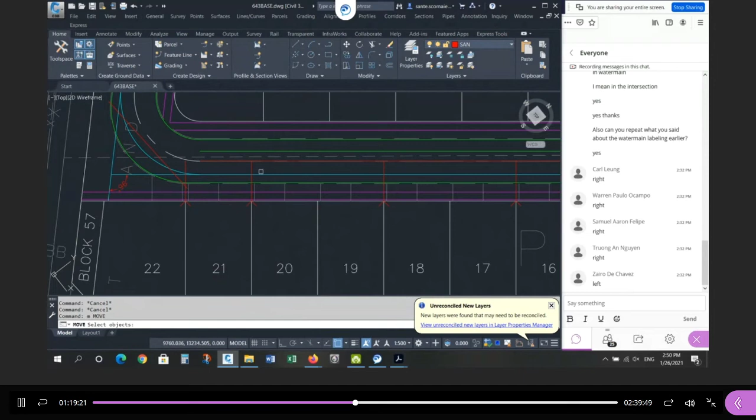If I put one here, not here, but here, and then here I don't need a dual. Now 21 has got 2 services. So now I can make 22 a single. Or I can shift all the other ones. I can take all of these all the way down the line and shift them by one. So now I've got a pair here, a pair here, a pair here. So you have to decide how you want to kind of lay it out.

Okay. When you get into the corners, perpendicular to that short pipe, right, you might have one there, or two singles, or whatever you need to do to make this work. Okay, and that's why this short pipe is required, so you can have the service connection perpendicular to it, or as close to perpendicular as possible. It's not always exactly 90 degrees, but you want it to be as close as possible, and you'll see examples of deviation of that here.

Once you get into these corners, right, how did they do these? You'll see here. See what they did here? See, they kind of kinked the pipe. So this isn't exactly 90 degrees. Do your best to make it as close to 90 degrees as possible. If you're not going to make it 90 degrees, make sure it's at least pointing downstream. Otherwise the connection to this pipe would be pushing the wrong way. Okay, what do I mean by that? I'll show you here.

You don't want to buck grade, they call it. Right? So if your sanitary pipe is doing this, and it's flowing this way, and it's flowing this way, and you have a service connection coming from this side, right? If I have a lot corner here and I want a service connection over here, right? I can't go perpendicular here, I'll miss the pipe. I can't go perpendicular to this one, I'll miss the pipe, right? So it's a problem. What am I going to do?

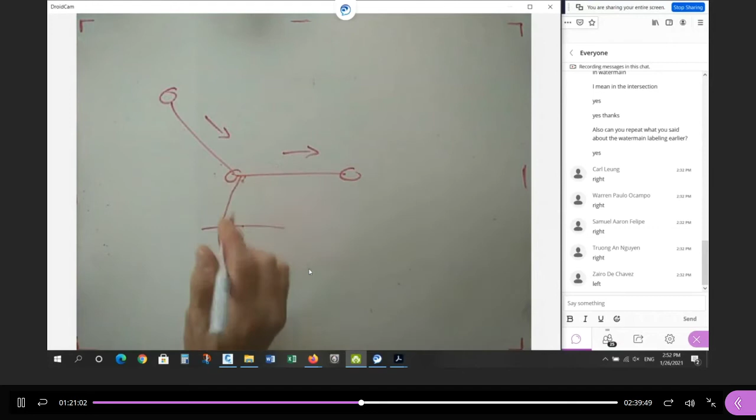Well, I have a choice. I can put it here close to 90 degrees, or I can put it here close to 90 degrees. This one I wouldn't do. And the reason for it is because I'm taking the flow and pushing it against flow coming in. And now this could come up the pipe, which is no good. So if the pipe is flowing this way, if you're going to hit the pipe at 90 degrees, good. If you can't do 90 degrees, always go downstream, not upstream. This is not allowed. It's not preferred, right?

So ideally, exactly 90. But if you have to shift it one way or another, always point down the pipe, right, in the direction of flow. So now the flow is nice and easy. If you do this, this flow could jump into your pipe and cause you problems. So hydraulically, it's not preferred. And that's why you see that solution on the subdivision that I just showed you. Right? So it's better to connect to this downstream pipe in the direction of flow than to push it up against the flow coming at you. You don't want this flow going into this pipe, right? You want this flow kind of naturally flowing into this one.

Do your best. I think there's a way of improving this. You probably could have made this a little better. Like maybe you can push this manhole further back and have 90 degrees to this pipe here. But again, it's acceptable, but do your best to keep it at 90 degrees if possible.

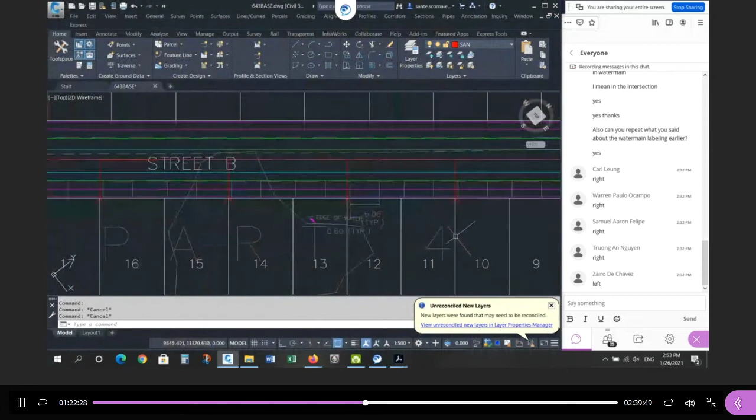Okay, that's your sanitary. Then your water main, again, offset 8 meters. Extend to the water main, trim it. Put this service connection on a different layer, right? Not the same layer as the pipe, but on a different layer, and draw the circle, the little service connection. You could borrow from here. You want to draw this and this. You can use the layer names existing and just change them to proposed, the C proposed. So you could put this.

Okay. Now here's the trick, and this is important later when we do our cost estimate and when we do our others. This pipe is underground. This curb stop is like a manhole or a maintenance hole. It's a surface feature. So think about your grading plan. Anything underground should not show.

So on the grading plan, we're going to turn off this layer and this layer. We're going to turn this off. We're going to turn this off. But on the grading plan, we want to see this. So it should be on a separate layer.

Okay? And for counting purposes, this is the water main. There's a certain cost associated with that. This is the service connection. There's a cost associated with that. So these should be on two different layers. And then this should be on a third layer. So water main, water service underground, curb stop: three different layers. And you're setting yourself up for the drafting presentation later.

If you look at the drawing, let's see if I can find it here, the grading plan. Here's the grading plan for the entire subdivision. Oops, not this one, sorry. The grading plan for the entire site is general. I don't know if it's on here. Grading, grad model, this one here. So here's the subdivision grading plan.

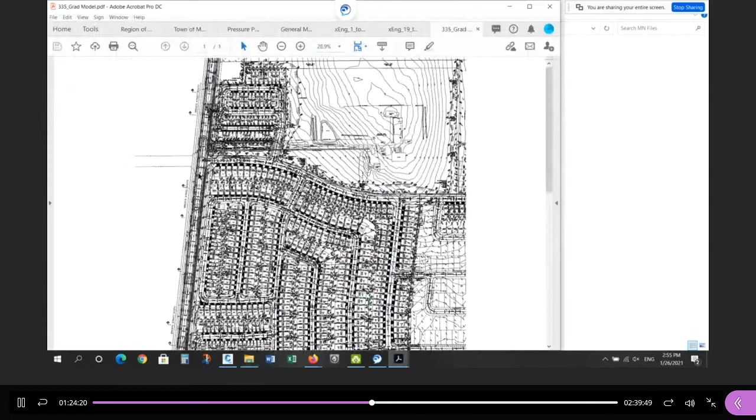If you zoom in on it, you'll see there's no underground pipes, but you do see the water service, right? So the sewers are all on layers that are going to be frozen. The service connection is also frozen, but the curb stop, that circle, is above ground. You would see it, so you'd want to make sure it's on a different layer. Okay? I don't know if you've got a copy of this just yet. I'm just giving you a heads up. Anticipate what you're going to do later for the drafting.

And again, change the layer not to existing but proposed. So you can call it C water service instead of existing water service. So you can borrow some of these layers, the names, right? This is called existing water pipe. You can call it C water pipe. You can call this C water service, and so on, right?

But you'll see here, watch, oh, they put them on the same layer. I wouldn't do that. I would make these separate, so you can turn off the underground stuff but have the above ground separate. The service connection for sanitary, it's all one layer, because it all disappears as well. Okay, so you can follow the layering scheme of the original site. Okay, so that's the servicing and so on.

So there's a lot of work to do. I will give time next week to ask some questions. This is one of those courses I wish I could teach to you after you take this course, and then we can talk about actual design issues as opposed to how do you do stuff. And how do you do stuff is skills you've already got but never used before to do this kind of work.

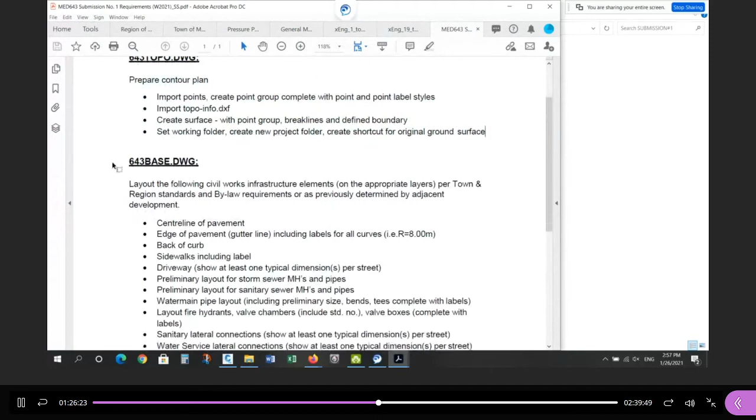We talked about the center line. We talked about the edge of pavement, back curb, sidewalks. That was with the driveways and the sanitary, storm and the water main layout. That was the first week's work. Today we talked about hydrants and valve chambers. But remember, you have to do your services first. Sanitary connections and water service connections, do them first, and then come back and do the hydrants and valve layout.

Okay, so this is a little bit backwards. This should happen after these two. Okay, and then you need to define the center line of the road and draw the profiles. Just define the center lines and the profiles. I'll do one, you have to do two, both roads. Let me do this and then there'll be some time for some questions because we still have about an hour left.

Okay, any questions about those so far? The service connections, the hydrants, the valves. Okay, so please make note of that. This list should have been a little bit better laid out. You have to do your sanitary and your water connections before you do the hydrant and valve chamber layout. So switch these. These two bullets should happen before this one, right? Yellow before blue. So make a note of that somewhere. Otherwise, it's not going to make sense. So there is a little bit of an order to what needs to happen.

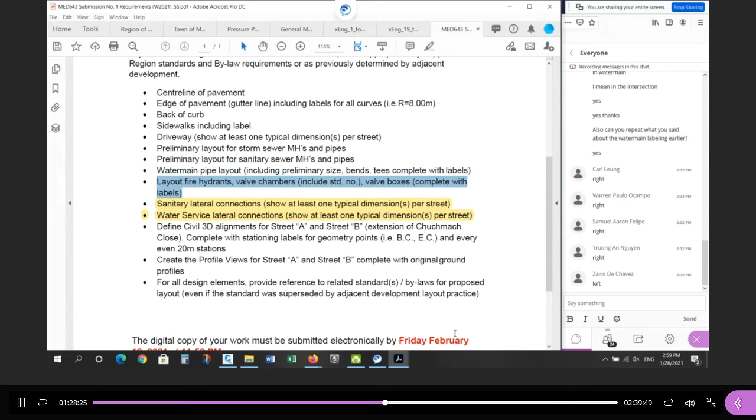Did anybody go ahead and start laying out their services? Remember, you can unmute yourself. I'm allowing audio if you want to talk, if you want to ask a question. Okay, if you're not talking, stay muted, please. But you can unmute yourself if you want. Sorry. Yeah,

so let's create the alignments. I'll start with Street A. I'll do both, but it's more of a review. I'm going to isolate the center line proposed, the existing center line, the street line proposed and existing. Okay, so we're just going to look at these, right? Center lines and right-of-ways. Okay, these hydrant offsets you don't need to worry about.

So to define the alignment, okay, here's how you do it. This is review. You go to alignments, and you want to create by polyline. Okay, so before you use this command, make sure you have one continuous polyline, right? So I'm going to list this. This is the easiest one. It's just one line. So it's a line. I'm going to create a polyline edit. Say yes, and now it's a polyline. So if you list it, it'll say polyline.

This alignment for street B, you want it to start at the beginning, the original beginning, and create the alignment all the way through and then into the site. So this is the polyline for the entire street. Part of it is existing, but we still need to define it, and the rest is proposed. Okay, I'm going to turn off the existing center line for a second. So you want to leave this layer, the center line existing. I'm going to turn it off, but you still want to have the geometry proposed for the whole thing. Okay, so just be mindful of that.

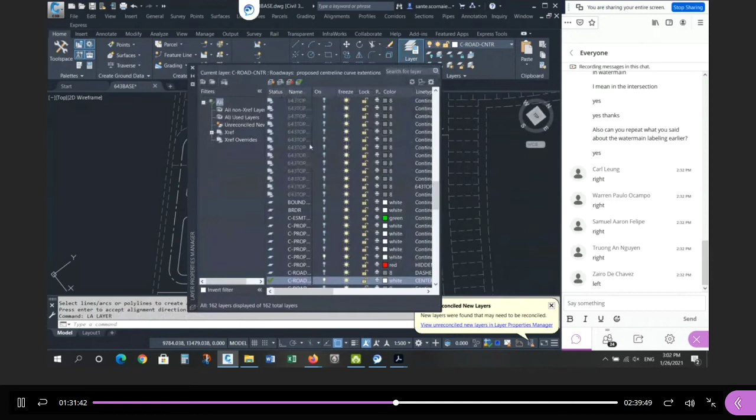So alignment, create from polyline. I'm going to choose close to this end, enter. Yep, that's correct. I'm going to hit enter. You'll get a dialog box, right? So you'll name it Street A. And then you can accept the defaults, except this, turn this off. Don't add any curves. And you can delete the original one. Okay, now turn on all your layers and you should see that alignment. If you don't see it, regen, and you should see the alignment.

So there it is. There's the alignment. Notice 0 is at the beginning and positive chainage is increasing into the site. 80, 100, 120, and so on. The next thing you want to do is move where 0 is. You want 0 to be where the two center lines cross, the intersection of this and the line. That's where 0 should be. So again, you do not move the label. That doesn't do anything.

Right? If I snap to here, that doesn't do anything. That just moved the label. 0 is still here. So leave the labels alone. To change the location of where 0 is defined, you click on the alignment, you right click, you go to alignment properties, and then you go over to the station control tab and you click on this button here, and you're going to select a new location for where 0 is going to be.

So you click here, it's going to warn you, do you want to do this? Say OK. And now you're going to use your OSNAP INT intersection and snap where the two center lines cross. And when you say OK, watch what happens to the label called 0. I'm going to say OK. And now the label adjusts to the new position.

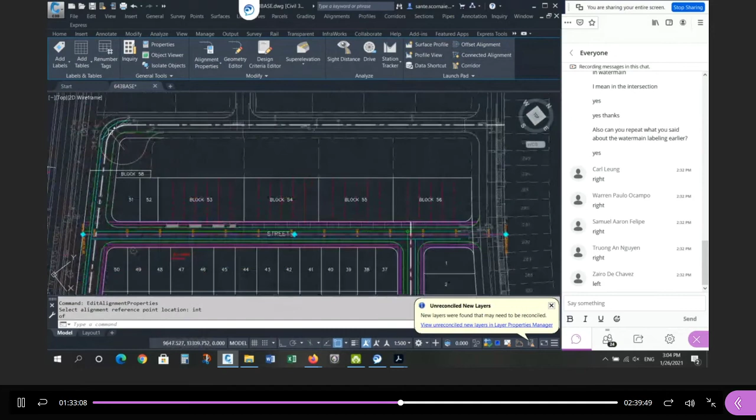Okay, I'll do it again with the other road. So here's the alignment, right? There's the center line for Street B. So let's do it again. Alignment, create from polyline. Okay, and it's hard to choose here because there's the existing and the proposed. So I'm going to pick this corner here, which is still closer to this end than it is to this end.

I'm going to hit enter. Here's the little cue right here in the corner. See the arrow? Yep, that's the direction of increasing chainage. Correct. I'm going to hit enter. And then change the name, Street B, turn this off, say OK, and you get your alignment, and it's increasing in that direction, 80, 100, 120, 140, and then we go to the intersection, and we tell it, hey, 0 shouldn't be there. It should be right where the center lines cross.

Okay, so we right-click on the alignment, alignment properties, change the position of where 0 occurs. Yes, I want to do this. Use your intersection, OSNAP INT, and snap exactly to where the two center lines cross. Be careful you don't choose this intersection, the edge of the manhole. It's the center line intersection right here. Say OK, and now you'll see the label adjusted. And that's the alignment for Street B.

Save your drawing. So that's how you create an alignment. Again, that should be review from CDA. You've done this before. You only did it once. Here you get to practice twice. The next thing you want to do is produce the existing ground. I think this is the last thing. The existing ground profiles, original ground profiles.

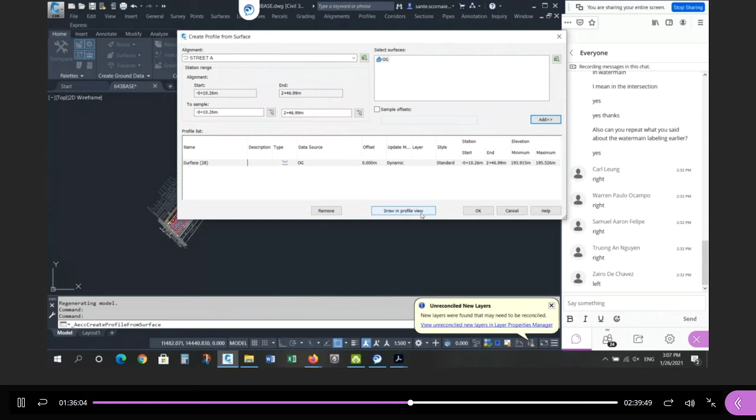Profile. Create a profile from surface. So this creates the existing station elevation list of proposed centerline stations, existing surface elevations. For street A, the original ground surface should already be shortcut into this drawing. Click the add button and that creates the data. Okay, and now you can draw it in the profile view. Change some defaults here. You don't want the standard profile view, you want the road one. This is what we did last year.

Okay, and then if you want to, you can skip over to 1, 2, 3, 4, the data bands. Choose the road standard data bands. You can delete the first two, but we'll do it after. And now you can draw this. So here's the profile for street A. Okay, and you can delete the labels. You don't need those for existing ground, and you can change the style of the existing ground to existing road.

So again, you're going to pick on it, right click, edit profile properties, change the style to road existing. This will be that red dashed thing we saw last semester. And there's your existing ground. We're not going to use these two bands again, so now we can go back to the profile view properties and go to the bands and delete the top two. I don't want that and I don't want that. Say OK, and it deletes those two bands. So that looks very familiar from last semester, right? What we did in CDA.

If you make any mistakes with the styles, okay, don't delete anything and start over. Let me do the next road and not choose any of the styles. See what happens, okay? So I'm going to do this again. I'm going to go to Profiles, Create from Surface. Instead of Street A, we're going to use Street B this time. I'm going to click Add.

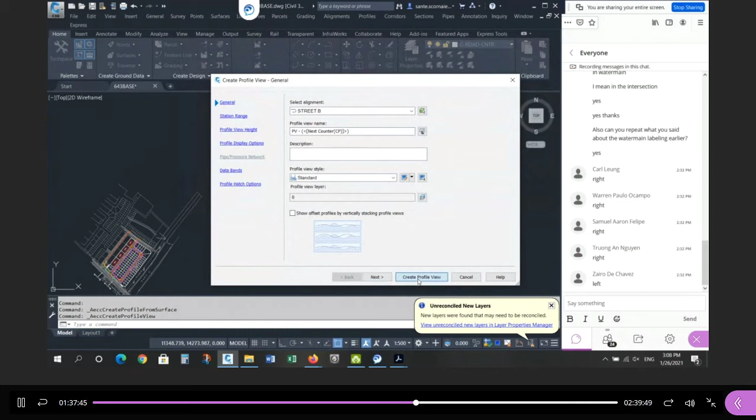That'll give me the data I want, okay? And now I'm just going to draw it, and I'm not going to change anything here. I'm just going to accept the defaults. I'm going to say Create the Profile View, and this is what you get, right? Wrong style for the view, wrong style for the existing ground. It's all a mess, okay?

So you have a couple of options here. I believe you can match the property. This is the AutoCAD Match Property button. You can take this profile style, this grid, and apply it to this grid. So now the styles are the same. You can delete the labels.

Now you can match the styles for the actual profile, not just the grid. Use that same command. Take this style for the existing ground and apply it to this existing ground style. Now they look the same. How do you get the bands?

Well, you click on the style, you right click, you go to edit the profile properties, you go to the bands and you go here, import band set, the one called road, and here immediately you can delete the first two. Say OK. And now this looks a lot like this. And notice it's much longer, right? Street B is longer than Street A.

So there's Street A, Street B, they're ready to go. And that's all you need to do for this assignment. Just have this ready, because in the next part of the design, we're going to design the profile of the road. Okay? Remember last year, we designed the green proposed road as opposed to the existing road. So I just want to get this ready so that you can start.

Another thing you may want to do, and let me get the view back, right? So I'm going to say UCS from here to here, north, straight up this way. I'm going to type plan and hit enter twice. That rotates the view. UCS, enter, enter. I get true north back. When I draw the plan profile for Street A, this is the view I want, right? This is the viewport I'm going to be looking at, the plan view of Street A.

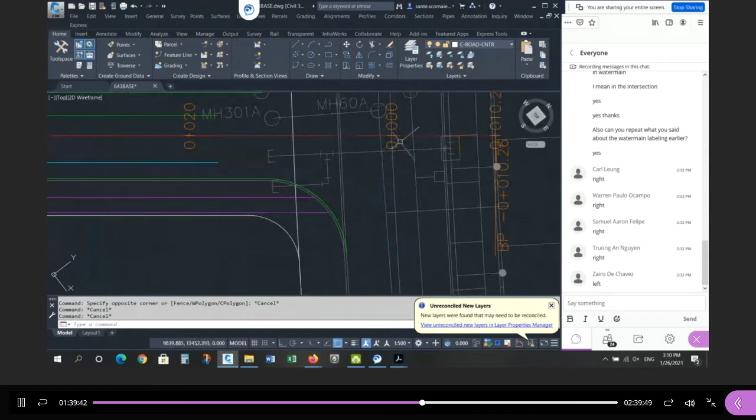Notice 0 is on this side, and the plan is going to increase from right toward the left. If you look at the profile, 0 is here, and it's increasing from left to right. So the plan is going from right toward the left, but the profile is going from the left toward the right. It's backwards. So because I want this to be my plan view, I want to mirror this. I don't want 0 at this end. I want 0 at this end.

Everybody understand? We want the chainage of the plan and the chainage of the profile both to increase from right to left. The profile is left to right at this point. So there's a style for that. I've already programmed it. Let me get the view back so you can see this happen. Plan, enter, enter, rotate back. And then here I want to change the style. I'm going to right click, go to Profile View Properties. And instead of the one called Road, I've got one called Road right to left.

These two are actually the same. But the right to left will now flip it so that the 0 is on the right and increasing toward the left. If I say OK, watch what happens. It flips it. Now 0 is here, and it's increasing right to left. So my plan and my profile are both increasing from the right toward the left. Okay, so that's new. We didn't do that last semester. We did everything left to right.

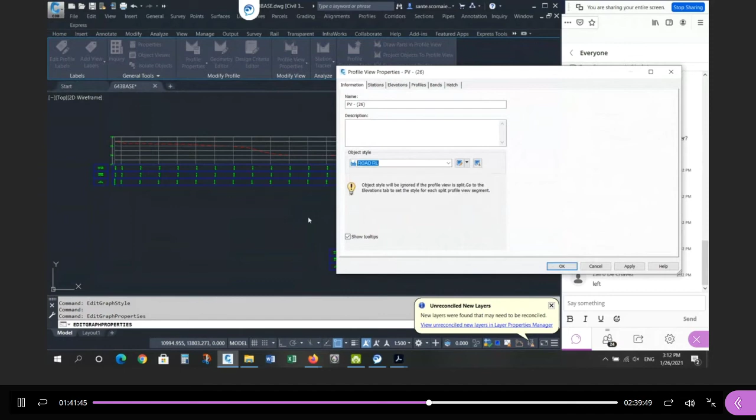Okay, so please, when you hand in your assignment, make sure that Street A is increasing in the profile from the right side toward the left. Get it ready for the plan profile setup later. I'm going to be checking for that, right? So make sure you use the correct style. This one is right to left. Street B is typical, left increasing toward the right. And leave that alone. Why?

Because when you look at the plan view, whoops. When you look at the plan view for Street B, this part is increasing from right to left. But the piece we're detailing, the piece we're going to show, theoretically, is increasing from left toward the right.

So this plan view is increasing from left toward the right, which is exactly what the profile is doing. 0 here, increasing from the left toward the right. So leave this one alone. It's typical, but this one has to be switched to go backwards the other way.

I think I've touched upon everything you need to be able to produce for next Friday. So you still have almost 2 weeks to finish the exercise. We're done at 4:10 today, right? Got about another hour. Why don't we take a 10-minute break? And I hope some of you have been trying some of these techniques, and I'll answer any questions, okay? And again, remember, you can either type or unmute yourself and ask a question verbally. So if there's anything I said today or in the past couple of classes about how to do something, or you want to see me demonstrate something for this particular submission, we have about an hour or so.

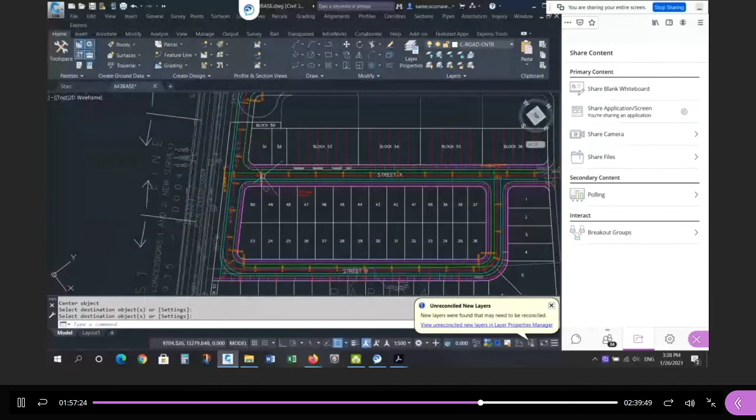Right, so there's no sanitary or storm sewer on this piece of Street B. Okay, so we don't have to worry about sanitary and storm here. The sanitary and storm sewer will stop short. So if you look at Street A as an example, your service connection, you could have a double here, remember? And draw it better than what I just did, right? Draw it exactly, accurately, the way I did before.

But if you put a service connection here, then your last maintenance hole could be here. There's no other sanitary connections beyond that point. And then you might have another double here. So this is the limiting factor. So your maintenance hole should be just on that side of the service connection. Anything longer is a waste of pipe. Okay? So that's the first thing I said. You don't know where to stop the pipes until you know where the service connections are.

Now the storm, put it nearby, but you won't know where to stop the storm sewer until we lay out the catch basins, which we're not doing yet. Right? So put it somewhere. You could put it near the intersection or not, but until we know where the catch basins are, we won't know the length this sewer needs to go. So put it near the sanitary, but certainly this could be here or a little closer.

Service connections into maintenance holes, I don't believe are allowed. I can't remember if it's written in the standard or not, but I don't see that happening anywhere on the subdivision. So here's a dead end. You notice the service connection is not to the maintenance hole, it's to the pipe. And I see that throughout, right? Service connection onto the pipe, not the maintenance hole.

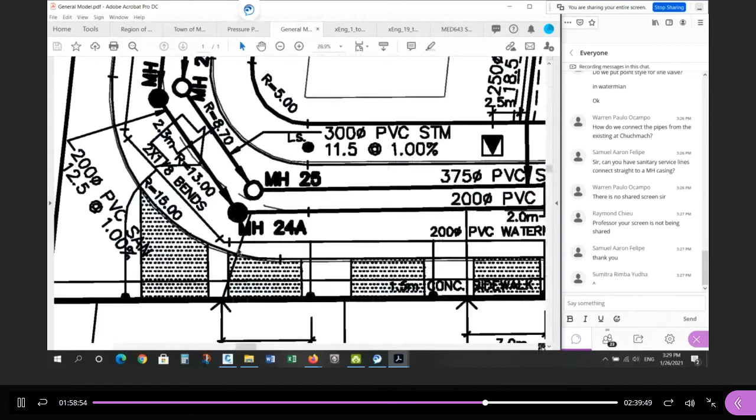There's a few of those examples. So do not put a service connection in a maintenance hole. Same thing here, right? You could have gone into the maintenance hole, no, onto the pipe. So maintenance holes are only for the street sewers, the main sewers, not the service connections. Sorry, Samuel. There's the picture to go with what I said earlier.

Okay. The other connection, Warren, I'm going to go back to yours, existing Chuchmach. The only connection you have to make there is the water main. So if you isolate the proposed and the existing water main, you need to put in a 45 in here. So I would probably draw the line that connects these two for the angle, endpoint to endpoint. Turn everything back on, and you want to put in two 45s, right? Two 45s here, and get rid of the curve. 45 there, and trim this off to here.

And remember, this pipe here is copper, but this pipe here is PVC. How do I know that? Well, if I go back to the drawing, we want to make sure that we propose everything that we have to, right? So this, see, is a 50 millimeter water main. This is copper. This is all copper all the way to this point here. Okay. So this is PVC pipe up to here. So you can ignore all of this because it's copper.

And then if you have that there, you might even be able to connect to it. I'm not sure. Right? So there's that piece here. So if you're going to put your 45-degree bend there, then you need to propose from here to this end of the pipe a plastic PVC water main, right? Because this is where the PVC ends. This label's in the way. Here's the pipe. This is plastic on this side. This is all copper on this side.

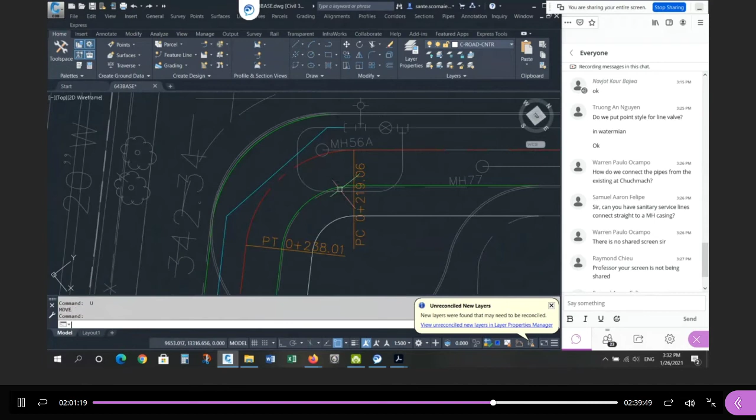And put your two 45s. Replace the plug with a 45 and put a 45 here. You've got a lot of flexibility here, except I don't want to disturb this maintenance hole. So that's not going to be a good solution. So maybe what I did before was better, right? So be mindful of your existing condition, right? So make sure you keep away from here.

One thing you want to be mindful of is the water main is very sensitive. They don't want to contaminate the pipe, especially with sanitary flow. You don't want your house drain, all that stuff from your toilets and your sinks, to contaminate the drinking water, right? We don't want to cross-contaminate. You'll find there's a requirement, and I believe it's in the standard.

This is worth reviewing. In the region of Halton, you're going to see a clearance. I believe it's here. Separation from storm sewer and sanitary sewer. You must be laterally, that means in the plan view, 2.5 meters away. So if you're a water main, sanitary and storm must stay away from you by at least 2.5 meters. And there's the standard that tells you that.

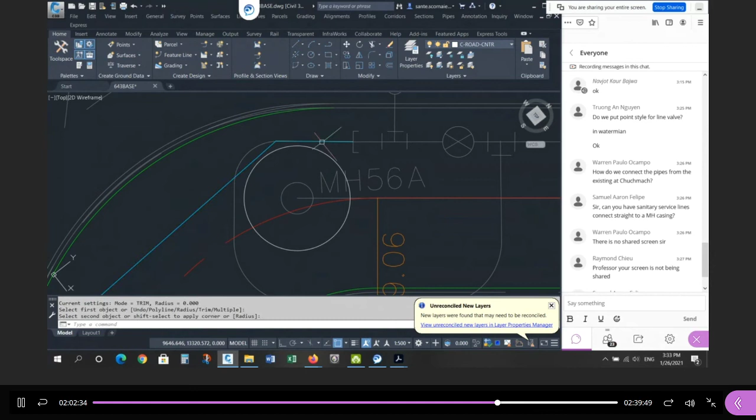So what does that mean? Usually most people interpret that as the center of the pipe or the center of the structure. So if I draw a circle from the center of the structure, 2.5 radius, the water main has to be out of this zone. So that's no good. So you might have to move this further out to satisfy that condition. Right? And now the water main is 2.5 meters away from the center line of the structure.

Some people will interpret it from the edge of the structure. So if you know the size of the structure, you offset 2.5. If that's drawn to the correct radius, you might have to stay out of this zone. Okay? So it depends on how you interpret it. Usually it's the center of the structure, center of the pipe.

And you'll notice the distance from the typical position of the sanitary to the typical position of the water main is more than 2.5. That's by design based on that standard we just looked at. So be careful. Make sure you keep away. If you're a water main, make sure that everything is away from you by at least 2.5 meters. And that's what I mean here, right?

Once you decide where your sanitary maintenance hole needs to be, right? If you're going to extend your sanitary sewer and put a maintenance hole here, right? You could bring it closer. You could bring it all the way up to here. Remember, you want to connect the service connection to the pipe, not the structure.

Once you know where that is, then maybe you offset or you draw a circle from the center, 2.5, and now the water main. Remember, we tried to draw the water main kind of in this direction. You want to make sure that it is out of that zone. So maybe that's where your pipe goes, not the curve, right? So now it stays away from this by at least 2.5 meters, center to center, right?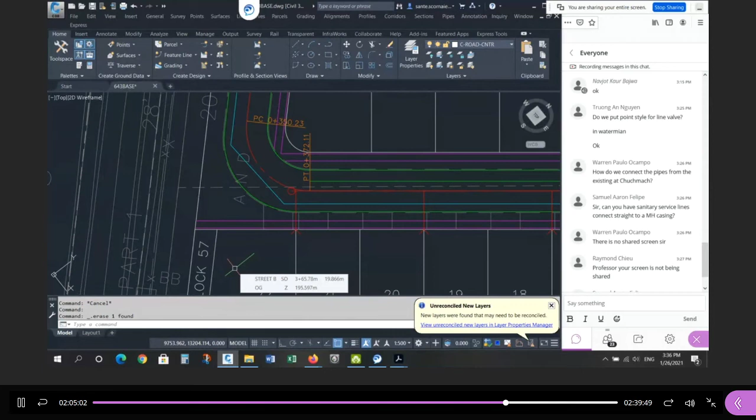So you wouldn't know where to put the maintenance hole until you see that. First we put the pipe in. Then we decided where the service connection goes. Then we can shorten the pipe, put the maintenance hole nearby, and then look at where the water main needs to go in relation to it, right?

So even though you laid stuff out already, you're kind of tweaking it all the time. And most of the time, just like in CDA, most of your effort is going to be zoomed in on the corners. What's happening at the corners and what's happening at the intersection. Those are the parts that need your detailed attention. What happens between the corners and the intersections is very typical for the most part. So you do it, and it works itself out according to the standard. But once you get into the corners and the intersections, then you really have to think about, okay, how am I going to do this now?

I'm still not sure about the position of the hydrants. Is it 3.5 from the right-of-way? No, remember, both of these roads are 16-meter right-of-ways, and we're using standard E2, so it looks like this. We're looking at this drawing here, E2. So to locate the center of the hydrant, you go 2.6 meters from the right-of-way, right? This is the street line here. So back to the drawing, 2.6.

So where do the hydrants go? We're going to offset 2.6 from the street line. And now your hydrant can be anywhere on that line, right? Remember, stay on the same side of center as the water. If the water main's on this side, the hydrant's on the same side of center. But you can't put it in the middle of a driveway. You can't put it on top of a sanitary connection. You can't put it on top of a water connection. So don't lay out your hydrants until you have your driveways, your sanitary, and your water connections all laid out.

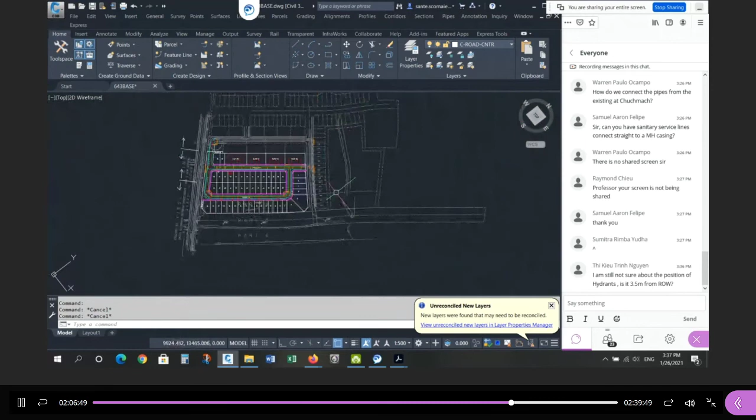Right? So you have to lay out all your driveways, all your sanitary connections, all your water connections. And then you'll see spaces where you can put your hydrant. And look at these hydrants. See this hydrant? It had a home right in here where there's no driveway and there's no water connection, right? So this is not by mistake. This was decided to be placed here after all the driveways, after all the water connections, after all the sanitary connections.

Okay, but the distance from the hydrant to the right-of-way, that's in the cross-section, right? And remember this is a 20-meter right-of-way. The distance from here, perpendicular to this street line, is 20 meters. So if I check the distance from the center of the hydrant perpendicular to the street line, it says 3.4. That's different. Well, it's a different cross-section. Let's look at the standard. You want to see where the 3.4 comes from? We look at the standard for a 20-meter right-of-way, which is E3. Where's the hydrant? 3.4. Ours is not 3.4. Ours is 2.6 because we're not looking at E3, we're looking at E2. Does that answer your question?

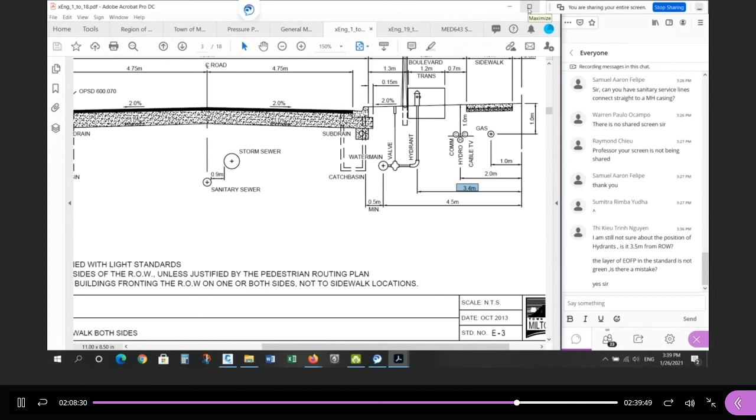The layer for edge of pavement in the standard is not green. Is there a mistake? No, I can't remember what the color is. Whatever it is in the standard, use that color. I'm not sure if it's green. In the standard it's gray for the edge of pavement. Are you talking about this layer standards, this one here? So back of curb is 8. Yeah, so make it 8. It's gray and make it dashed. Yeah, you can use this as a guide for sure. This isn't complete, but it gives you most of what you need.

How much is the allowance to connect the pipes in Street A to Ledger Way? You're talking about this? How do we get this connected to here? And how do we get the sanitary connected to here? I'm going to leave it up to you. Do something. Let's see what you got. It's time to shine. If I always tell you the answer, you're never going to think for yourself. So as long as this pipe is connected to this pipe, it will work. But there are some solutions that are maybe more elegant than others. But from a plumbing perspective, as long as you make the connection, the water will flow, the sanitary will flow, the water main will provide.

There's more than one way of doing it. I want to see what you want to do. Okay, so show me what you're thinking, and as long as you make the connection, I'm happy. But some solutions are a little more elegant than others. Okay? I'll leave that alone.

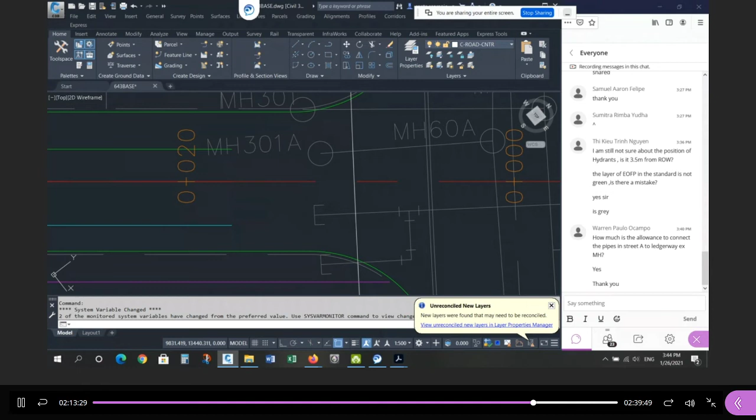Oh, okay, so I see what you're thinking, but did you think about this? Or maybe you missed that. Or the answer might be, yeah, that'll work, do it that way, right? So you never know. But if you show up with a blank piece of paper and say, how do you do it? You're not going to gain a lot of respect. Okay, so you really need to make an attempt before you start a discussion on, hey, does this make sense? If there's nothing to discuss, then they really won't want to deal with you.

So you really have to make an effort first, and then you can start a discussion about maybe, is there anything missing? Is there something wrong? Could it be better? How could it be better? And that's how you start to gain the respect of your colleagues, especially the people that are going to be supervising.

Okay. The worst thing you can do is call the municipality and ask, how do you want me to do this? Well, they're reviewing it. They're not designing it. So they're going to look at your design and tell you whether they're going to accept it or not. It's not their job to design it. It's their job to review it and make sure you followed all the standards.

They may have a suggestion on how they prefer you do it, even if it's not in the standard. And then you have to make a decision about whether you're going to change it or not. But generally speaking, they have the last word, but they review. They don't suggest how. They want to see what you're thinking, and then they'll tell you yes or no. And they may or may not give you a suggestion on what to do, even though they don't accept it.

Okay, so at the end of the day, the design really falls squarely on the shoulders of the designer, ultimately the review engineer, right? So if your career goes into a technician or technology level and you're not the engineer signing off on it, ultimately you have to satisfy the engineer. They'll review it before it goes for final submission and review by the municipality, but certainly you'll have to take some responsibility. So you need to show some initiative and make an attempt before you start to ask questions about what the best solution might be.

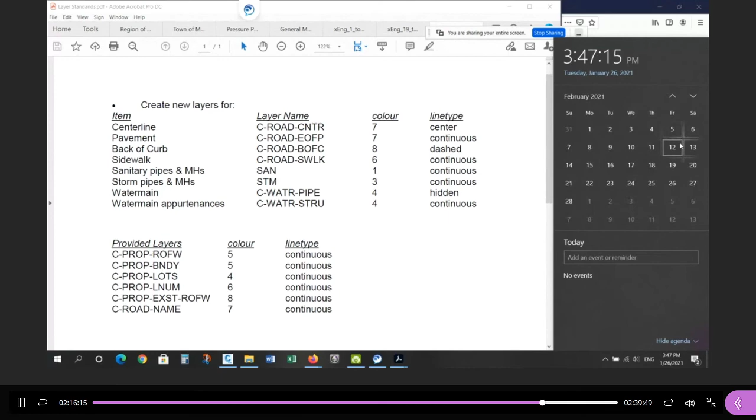There is no February 12th. Oh, there is. Okay, let me just check. Let me confirm the date. I've got it. It's in the course web page. Let me check. Hang on a second. Should be in the addendum. Pretty sure we settled on week 4. Yeah, week 4. It's due next week, week 4. So that was right. And I remember we changed it this year.

So we need to go to, not assignments, course documents. First submission requirements. Yeah, it's next Friday. I was showing you the wrong document. Okay, yeah, it's due next Friday. I was right. I was probably using last year's document. Everybody get that? It's due next Friday. Okay? I'm going to send a reminder. I will post a place to submit everything.

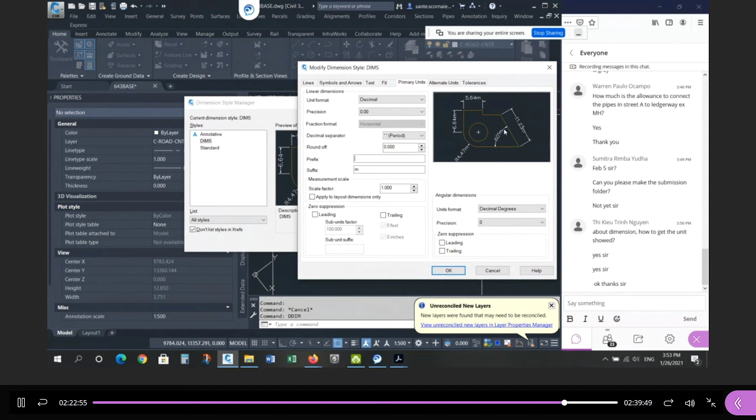So if you want to always have the M, you change the dimension style. And you go to modify, and you change the primary units, add the M here. And then every time you create it, you'll see a preview here, everything has an M. But be careful now, if you do an angle, it'll put an M there too. See that? That's a problem. So you might want to be careful about that one. If it's all just linear, even the radius here is good, but not the angle. So be careful, okay? There's a couple of things to watch out for.

Okay. Then the size of the arrow you could change as well, right? That's DDIM. Change the text to change the arrow size. So if you want the arrows to be a little bigger, you can change them here. So instead of 0.5, make them 1. Say OK. And you should see those arrows get bigger. Say OK. And now the arrow's bigger, and so on.

The text height. The height of the text. For dimensions, remember I said the standard text height is 2 or 1, right? L80 at 1. You can't change it here. You can't change it here. And you can't really change it here unless you create the style, right? So if you want to make the text for the dimensions a little bit smaller, remember instead of 1, you can use 3/4 or 0.75.

You can actually do this. You can actually type in style. This is a text style now, style. So L80 is a height of 1. We can create a new one, right? We can create a new one.

Call it L60, 3/4 of 80. Make sure that it's simplex, change the height to 0.75, and now you have a new style called L60 with a height of 0.75. Close this, and now if you go to your dim style, DDIM, and you go to modify, and you go to your text, you can swap out the height.

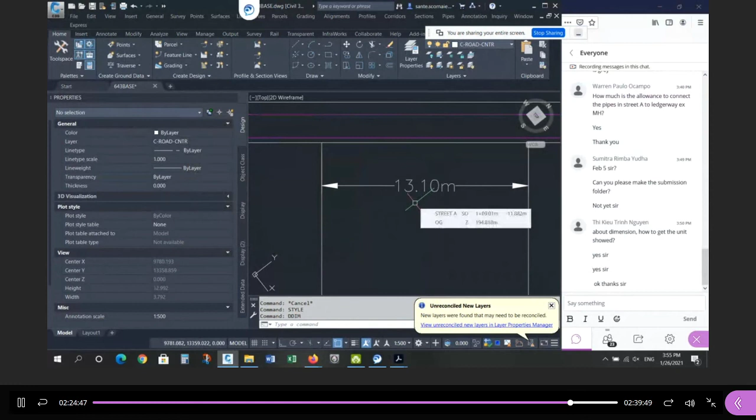So instead of 1, remember you don't have control over this, you can use the L60, and it'll pick up the 0.75. And now when you close this, this will get a little bit smaller, right? 3/4. And now the arrows look too big, so I might change the arrow size down a little bit. So for dimensions, I think it's cleaner if you have a little bit smaller, not the standard 1 meter, which will give you 2 millimeters in paper, but 3/4 that.

Okay, 1 will work, that's typical, but again, if you need to squeeze a lot of stuff in, you might want to reduce it by about a quarter, so 3/4 height. So instead of 1 meter standard, use 0.75. Okay. Make sure there's no overlap.

Keep it clean. You don't want text on top of text if you can avoid it, so that everything's nice and legible. It's okay to have text through a line, right? This text goes through this line, that's fine, but you don't want text on top of text. So when you start labeling stuff, make sure there's no overlap of text.

It's hard to read. Okay, so keep that in mind as well from a kind of best practice in drafting, right? You want to keep it clean. You want to make sure everything's legible. Any other questions?

I did post my office hours for this group, right? So I have some time. I think I sent out an email. If you want to meet with me to discuss something specific about your layout, your design, send me an email, and I'll email you a meeting request, and we'll schedule the time for one of those two. I think the time was either just before class on Tuesday or Friday at 12:30, I believe. So I set an hour aside for this group before class on Tuesday and midday on Friday.

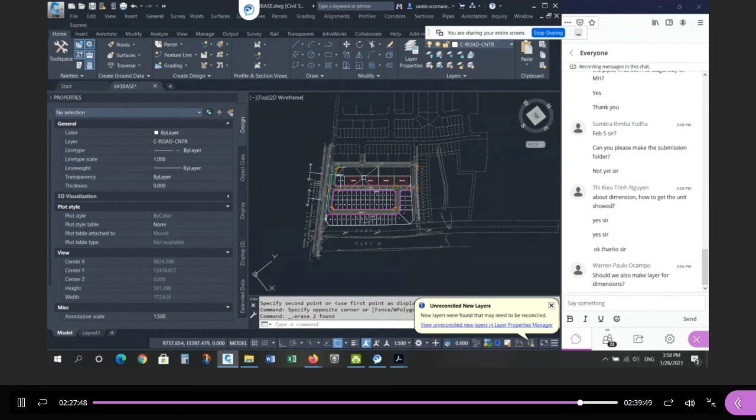There's a lot of work to do, okay, but it's not terribly difficult, it's very repetitive, right? Service connections, you can make copies of once you get it. Driveways you can make copies of, but again, pay attention to those special parts, right? The intersections and the corners. Review, always review. If you're not sure how to do something or how it should be done, always look at what the previous design has. And this will give you some insight and some clues on how you can lay out your stuff.

A couple of things I don't like about this drafting, again, is the driveway hatching going through the sidewalk, right? Here's the sidewalk between this line and this line. The hatch shouldn't go through the sidewalk, so please don't do that. It's misleading. The other thing that they do that I didn't like was the naming of the bends, right?

Instead of 90, 45, 22.5, 11.25 degree bends, they're using quarter, eighth, 16ths, and 32nds. It's kind of confusing, so please don't do that. Otherwise, the way they're showing their stuff is pretty good. Do not label sanitary sewers and storm sewers, okay? I just want to see the schematic. Where are the maintenance holes and where are the pipes for sanitary and storm?

Water main you can label, right? You can label the water main, 150 PVC, ours are 200, right? Label the sidewalk, label the radii, right? All the curb radii. How do we number the maintenance holes? Don't worry about that now. We'll discuss that when we digitize the pipes for the servicing.

Okay. You'll notice they're labeling it a little different than us, right? They're actually doing it backwards to what I taught you. Remember what I said? The last place where all the flow accumulates should be manhole 1 or maintenance hole 1. You'll see they did it backwards. See this here? 181. This is 81. This is 80.

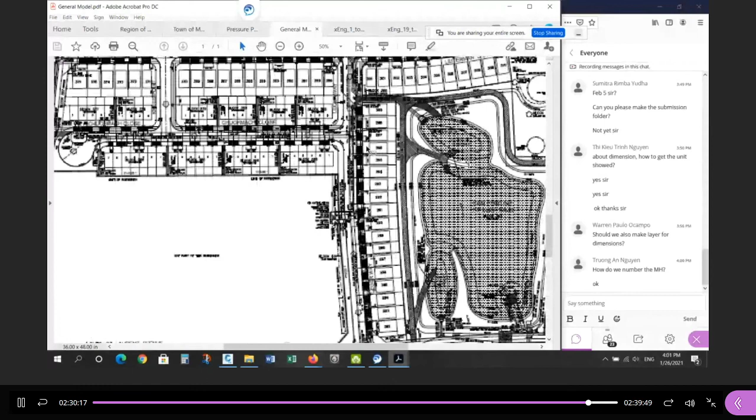So just like in Civil 3D, we're going to trace those pipes with the pipe network database, and then we'll label everything. We'll discuss that at that point. Right now we're just in a preliminary stage for the pipe layout. Water main, you can put a label. That's fine. And when you decide on what size, this is how you label. You draw it. So if it's the rectangular one, draw it. Use the inside dimensions. And then you don't need to worry about the number.

Don't number them. Just type in VC, the standard, and the standard is either going to be 400.02 or 400.01 if you're using the round one. And then put the T size. The T size is going to be 200 by 200 because all our pipes are 200 Ts. So they want to know the size of the water main going through, and they want to know the leg at 90 degrees. So this is a 300 pipe, and this is a 200 pipe. So the T is a 300 by 200.

So use this text style. Don't include the number. I don't need to see the number. So just VC standard and then the T size. And make sure you draw it. If you're using 401, it's round. If you're using 402, it's rectangle. So at least draw it schematically. There are others, like that one's 401. This 402 is the rectangle, but there are some round ones in the site. This is also 402.

Let's see if I can find 402. You'll find a round one somewhere. There's a few. 402. Here's a round one. Here's the 401. There's round. Okay, so make sure you label it correctly. Don't number them though, just VC, standard, and then the T.

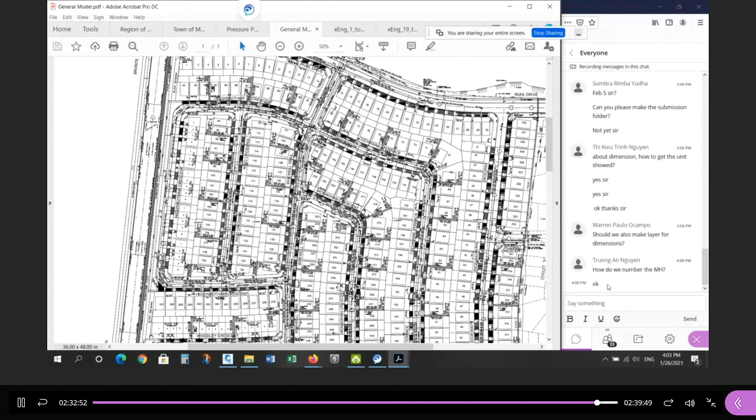Okay, so Truong, just to get back to your question, the maintenance hole numbering, we'll deal with that later. Any other questions? Could you show us how to parallel the labels with the line? Yeah, I could do that. So if we had text, dtext, actually I'll show you a couple things.

If you take a piece of text from anywhere, change the style to L80 if you want to use L80. Then it'll be a height of 1. If you want it smaller, change the text to L60. If you created it, it'll get a little bit smaller, 0.75. If you want to label the bends, if this has a rotation of 0, I would start with that.

And now this is parallel to the x-axis. If you look at your icon, this has a rotation angle of 0. It's east. It's parallel to the x. So change the rotation angle to 0. And then what I do is I take the text, I take any of the grips, I put it on the line, and then I rotate.

Whoops, then I take that grip, grab it here, and I hit enter. This is a grip edit, so see it says stretch right now. I hit enter, move, I hit enter again, rotate. So now I can rotate, and if I'm in world coordinates, I'm parallel to the x-axis. So now I can snap here, near, and it's parallel to this line. So always start with 0.

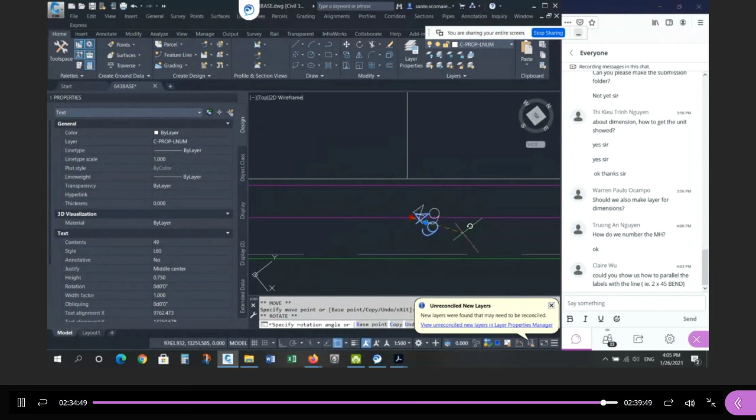Put the insertion point on the object you want to align. So say I want to align it to the sidewalk, and then click here, click in the grip, and then cycle through the different commands. Not stretch, not move, rotate, and then snap, and now it's parallel to the line. Does that help, Claire?

Okay, and then if you want to do the two 45-degree bends, if you want to take that, copy, I'll put it here. You can paste in the text, 2 45-degree bend. The degree symbol, if you want the little degree symbol, there's a code for it in the DTEXT. It's %%D, I believe. Okay, so if you look at this, you'll see there's the code for it, %%D. That code will show up as a degree symbol.

There's others. If you want it to be the diameter symbol, instead of %%D, it's %%C. Now it looks like a diameter symbol. So there's a whole bunch of codes, right? But those are the two more popular ones. If you use %%P, P as in Peter, it'll come up as the ± symbol. See that? So there's different codes for more unique symbols. The one you want for degree is %%D.

And if you're going to use the 2 by, I would use a lowercase x, and I would get rid of the spaces, make it nice and tight. And if there's 2 of them, it's bends. Again, we're getting real picky now. Or you can have 45-degree bend, 45-degree bend. You could have a label at each point, one here and one here. You can have one label for both.

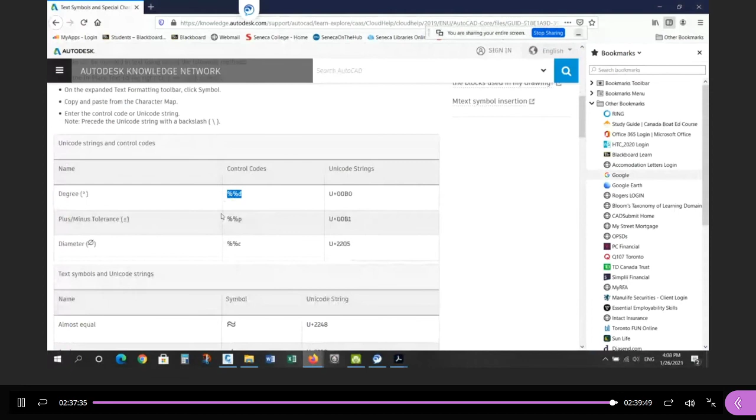So if you search AutoCAD text codes for symbols, you might see a list. Right, so %%D, %%P, %%C. These are the 3 I remember. But then there's others. If you want the center line symbol, it's this code here. Anyway, there's a whole bunch here. Some of them I never use because I don't do this kind of stuff. That's where I learned most of this stuff. The delta symbol, for deflection angle, it's right there. Yeah.

No matter how much you know, somebody else always knows more, right? And the nice thing about the internet is there's a lot of information there. I don't know everything, but sometimes you don't need to know everything. You just need to know where to look for everything. And there's a lot of stuff online. So if you're not sure, you could always Google it.